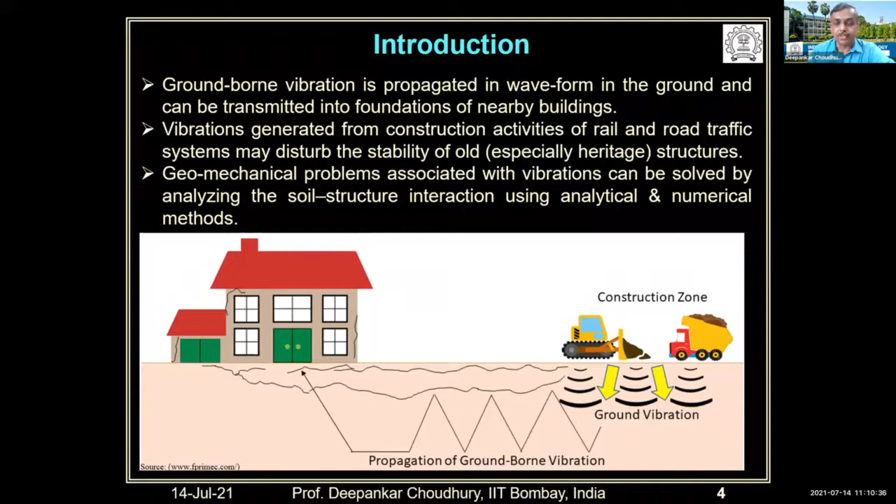So this ground-borne vibration, as I mentioned, can come from construction activity, train movement, vehicular traffic movement, etc., which need to be checked, and also seismic activity, of course. So first, I would like to highlight the theoretical work done in our laboratory. Of course, there are several researchers worldwide who worked on this topic, but from IIT Bombay, we tried to work on this area analytically and numerically.

So this is the paper. One can see the details in the Journal of Geotechnical and Geoenvironmental Engineering in 2018, a work of Tulika in collaboration with our lab and the RWTH Aachen lab, because it was under the DAAD exchange program and research project. So essentially we tried to find out, if you have an existing structure, what is the mitigation of ground-borne vibration coming from future construction, harmonic load, machine-induced load, or a future railway line, etc.

So here Tulika studied providing an open trench and an infill trench, both conditions, and how that helps in reducing this kind of ground-borne vibration on existing foundations. So this is the mitigation technique proposed, which is nothing but vibration isolation in terms of an infill trench or open trench. She checked how they perform along with the case of the German train, Deutsche Bahn's ICE, the highest speed train in Germany.

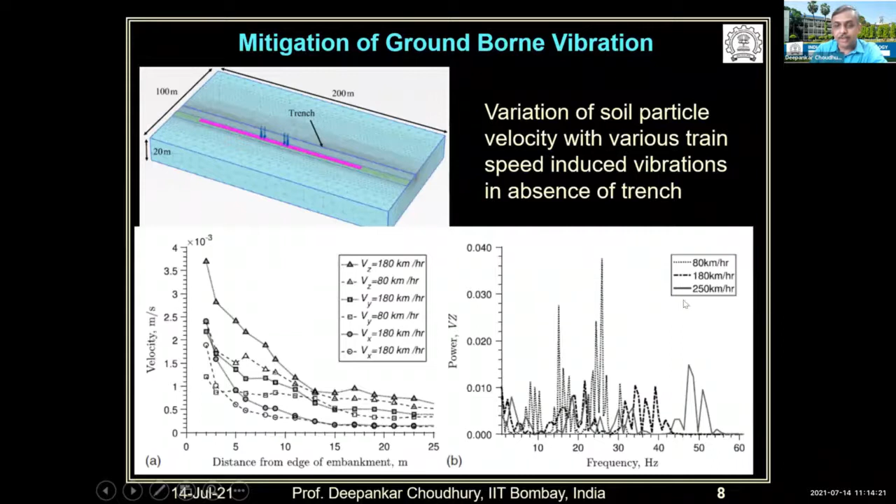This is in absence of a trench, first of all, when no remediation has been considered. This is based on different speeds of the train, shown over here.

After this theoretical knowledge, we executed two real life projects of national importance. The first case study I want to highlight: our duty as expert advisors was for the archaeological impact assessment study due to vibration, for heritage structures of the New Delhi region, for the proposed Delhi Metro extension line, in short DMRC. This is line 4, the new line coming up. As we know, till now Delhi Metro has three phases essentially, not three lines, three phases, and now the 4th phase is coming.

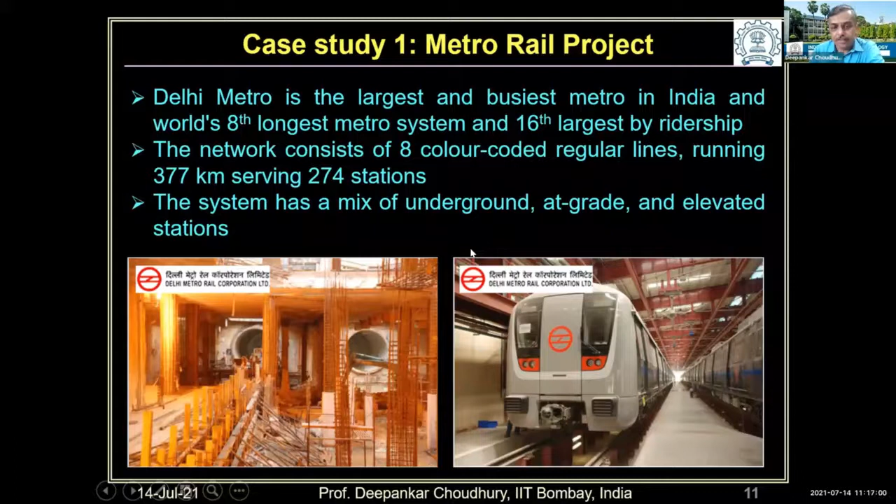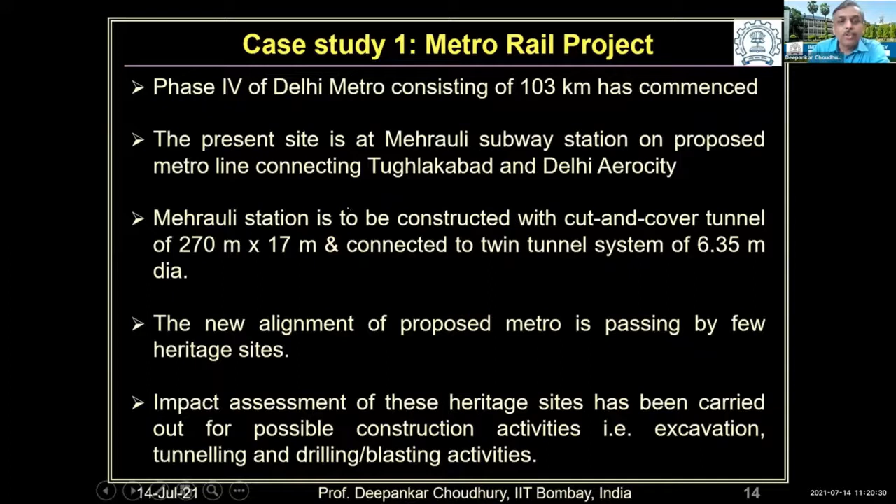Gandhak Ki Baoli is the closest one, 41 meters. The next one is Rajon Ki Baoli, 78 meters. And Qutub Minar is about 300 meters away from that line.

So what are the activities during ground vibration and transmission? These are the things which create ground-borne vibration, for which we have to find out the stability or suitability of the foundation system — foundation piling, drilling and blasting, chiseling and excavation, tunneling through the tunnel boring machine, and other construction works.

The factors which influence damage to the structure include duration of vibration, state of stress, energy per blow or per cycle, distance between the source and the receiver, characteristics of the structure, and soil profile. So what is the geotechnical condition at the site?

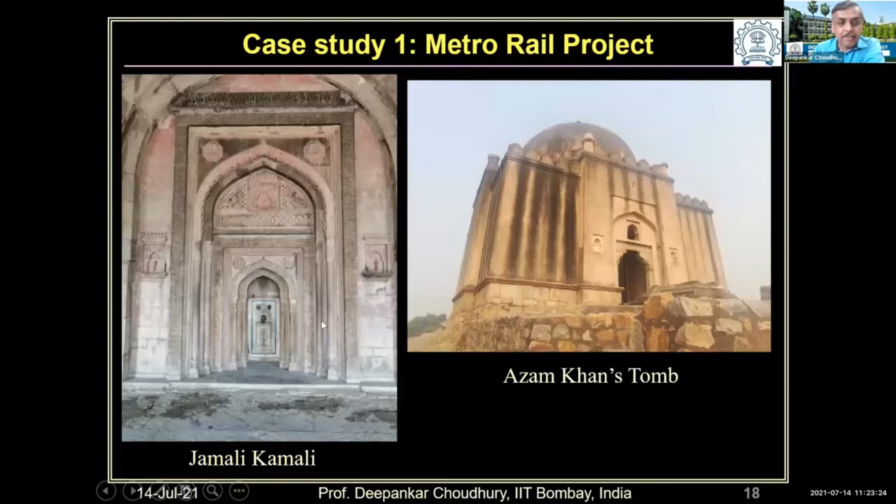The soil deposit at this site is typically about 5 to 12 meters — that is the typical overburden soil, followed by weak rock.

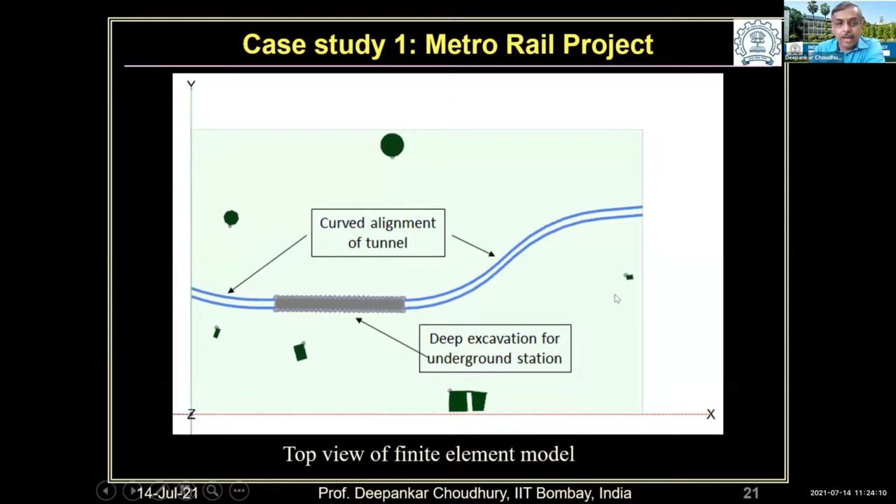The effect of ground-borne vibration due to construction activity on heritage structures has been assessed using three-dimensional finite element analysis in Plaxis 3D, to find out what happens at the Mehrauli station location first due to excavation-induced settlement. This is the Mehrauli station location, and this is the entire underground metro alignment in Delhi Metro Phase 4.

This is as per the codal provision. First we checked all the codal provisions. For such an important project, we have to stick to our Indian code, so that was checked. But in addition, we verified various other well-renowned international codes used for international projects as well, so that it increases the confidence level.

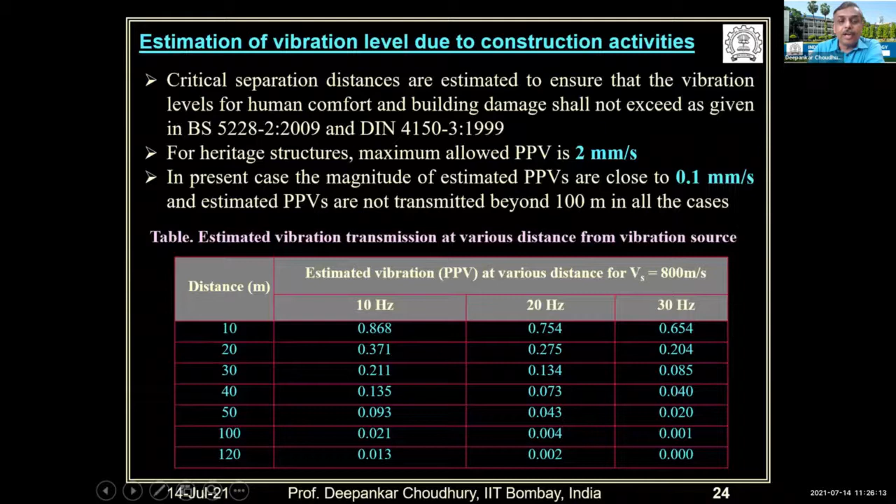Next, we have to check when the tunneling is working or tunnel work is going on, what is the induced vibration due to that tunnel work as per the BS code. You can see here the PPV value is a bit higher, it is not as low as what we have seen during the excavation time.

Then coming to the safe distance for the blasting action, it is a controlled blasting, because in the weathered rock, when they are constructing the station at a depth of 15 meters, in various phases of 3 meters each, they proposed 5 phases for the construction to be done. So as per our Indian standard code of blasting, how much blast charge is allowed at such distances for all these heritage structures, that also we have calculated.

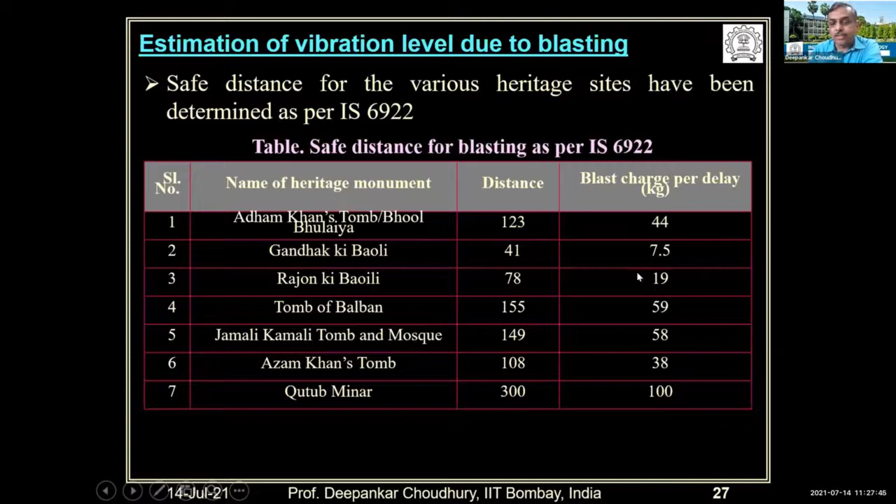Then we carried out the Plaxis 3D, three-dimensional finite element analysis for the Mehrauli metro station, which is at a 15 meter depth, with 2 twin tunnels going at 6.35 meter diameter. This is the influence zone or displacement contours affecting the Mehrauli station, and this is the cross-sectional view. You can see Rajon Ki Baoli is one of the nearest, and Qutub Minar is far away, so it is not even coming in the influence zone as far as this ground-borne vibration is concerned.

These are various plastic points for the excavation. As I said, phase-wise excavation was proposed in 5 phases for the Mehrauli station, and how much it affects the total displacement on all these existing heritage structures, that actually we have computed.

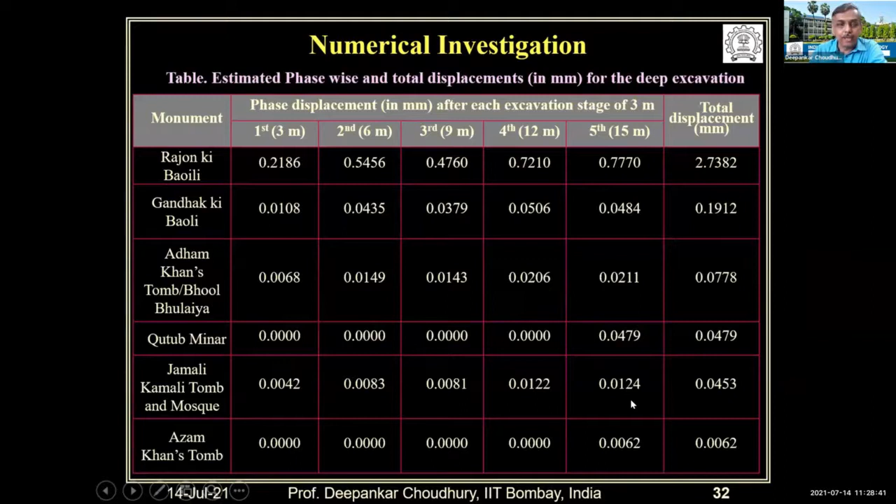Then 2-dimensional analysis has also been carried out in terms of tunnel work, like when the tunnel boring machine is moving in the entire stretch of the metro tunnel, how much disturbance or ground-borne vibration it is creating, that also we checked. You can see this is the influence zone, and these are the locations of the nearest heritage structures, for various conditions of whether a single tunnel is first constructed, left side or right side. So we have given all the options, to see which becomes the critical one, with 2 tunnels, etc.

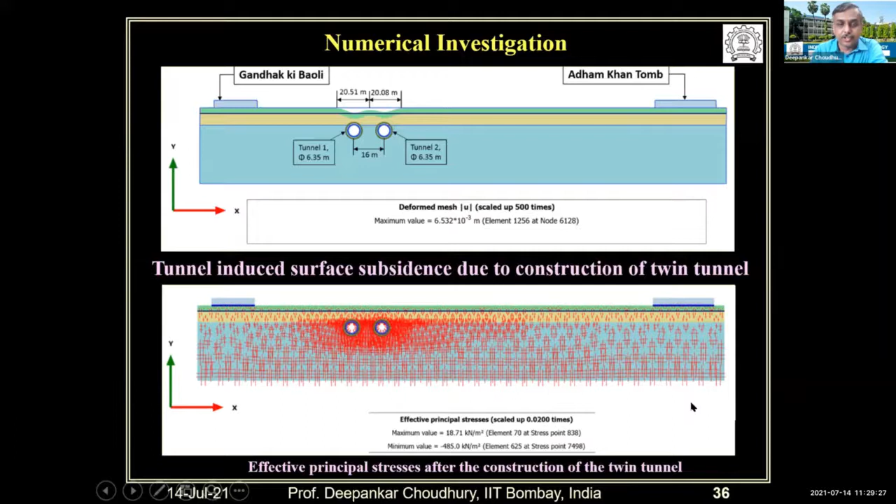So you can see this is the tunnel-induced surface subsidence, shown over here in this top picture, due to the construction of the twin tunnel, and this is the effective principal stress and how it changes.

The third thing we have to check, remember, is not only all these vibrations due to ground-borne vibration, but also due to the seismic effect, because let us not forget the zone - Delhi is in seismic zone 4, as per the Indian code seismic zonation. So we have to check whether under that zone 4 also, this activity of underground tunneling has an effect on the nearby heritage structures, how much it is there or not.

So finally, these are actually the degrees of damage you can see, and the corresponding details with limiting strain. And this is what we have finally recommended to them, what they should do, like parameters to be monitored at the construction phase and at different phases, maybe the nearby structures have to be monitored, and the frequency also has to be maintained as we have proposed over here.

So as I said, typically for 40 meters to 100 meters, those heritage structures, we found that their PPV is less than the proposed threshold limit of 2 millimeters per second, so which is safe. And that's why we have suggested that with those recommendations, they can go ahead with this construction.

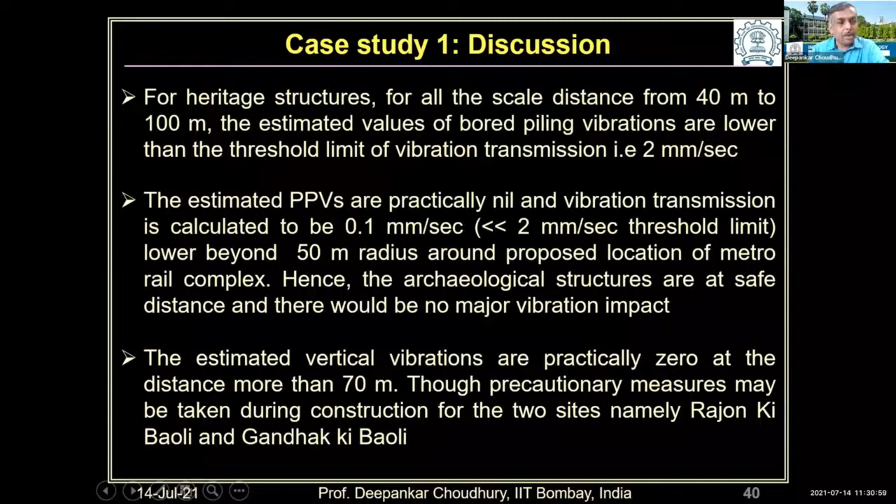Now, because of lack of time, I will quickly go to the second project which we executed recently. This is in Mumbai. You can see here, as you all know, the bullet train project is now going on in full phase. Actually, I'm happy that Dr. R.P. Singh is here as a chairman for this session. He is deeply involved in this project of the Mumbai Ahmedabad bullet train.

So we got this project through AECOM, where we have been asked to provide expertise. There is a data center building in Ghansoli, Navi Mumbai area in Maharashtra, which is very close to this bullet train site. And they are very worried, because in a data center, as you know, several systems, computers, everything will be there. The building is about 46 meters in height and the plan dimension is 85 by 45 meters.

You can see that 25 meters is the distance of this data center building from the proposed bullet train segmental line. So we have been asked to check whether it creates damage to the data center building, the foundation system, and the overall entire structure. So here also we have checked all the conditions like bullet train operations, and also during construction, the tunnel boring machine operations, how much it affects, as well as the seismic operations.

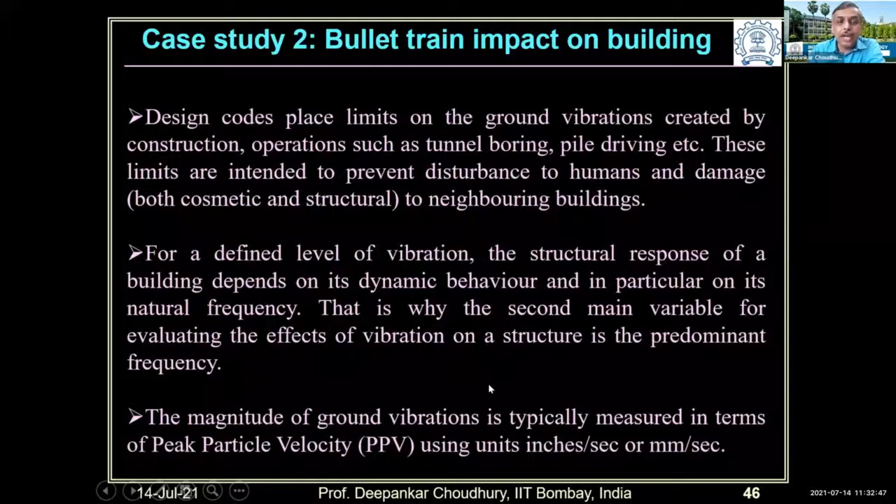So here again, we have checked the design code provisions first, and then we have executed the numerical analysis for this project, that is, how much magnitude of ground vibration is coming in terms of PPV. So first we checked the codal provisions, as I said, not only the Indian code but also all important international codes. Like first the DIN code, you can see the reference value of equivalent PPV for various constructions is mentioned over here, like 30 mm per second for well-reinforced buildings, etc.

And for buildings not corresponding to the above. So for security purposes and a data center building, with restrictions, etc., they try to go for the lower value. This is as per DIN. Again, I mentioned it is highly dependent on the frequency of your dynamic loading. So at what frequency ranges these PPV values change, you can see, for buildings used for commercial purposes, industrial buildings, and all those details are given in this code.

This is the Swiss code. Switzerland uses this code for such bullet train construction and associated ground. You can see M essentially stands for machine, traffic, and construction equipment related things, and S is related to blasting. So here also they have given a range of frequency, and corresponding to that, the limiting values of peak particle velocity for various conditions of building.

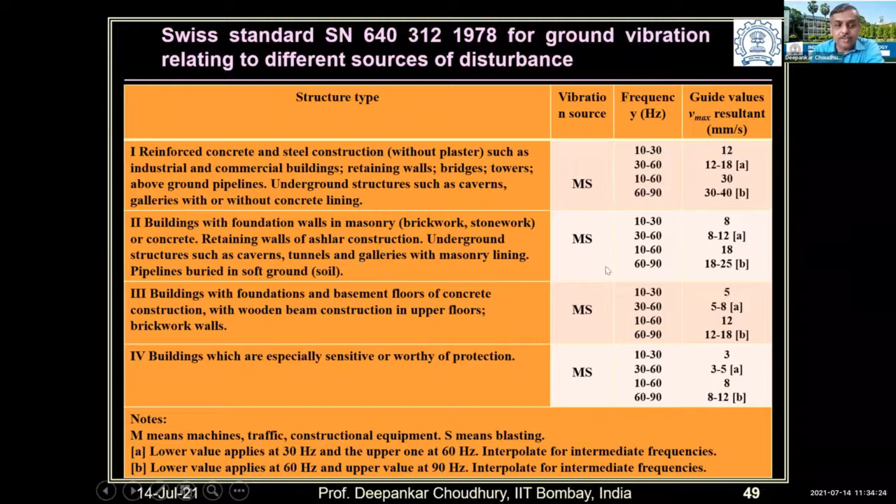The Australian standard also, you can see, for historical buildings it is 2 mm per second, which our IS code also mentions. So essentially this we have used, as I have shown in the Delhi Metro project. So this Australian standard also gives, depending on the rise of the building, the condition of the building, and the utility of the building, what the value of the PPV is.

And here the subsurface soil profiling was given to us, the SPT values at 10 borehole locations. These are the typical layers: initially about half a meter of fill material, then from half to about 2.5 meters is weathered rock, and then good quality basalt rock is available. Those aware of the Mumbai region ground profile will know this.

So now, TBM induced vibration, how much it affects in terms of PPV. This is the chart of Hiller, which is equivalent to what we typically teach in a soil dynamics course, the Richart chart for machine foundations. This is a kind of equivalence, that TBM induced vibration for different types of soil, how much disturbance it creates to human beings, to structures, whether it is noticeable, non-noticeable, blasting, and when it goes to complete damage and so on.

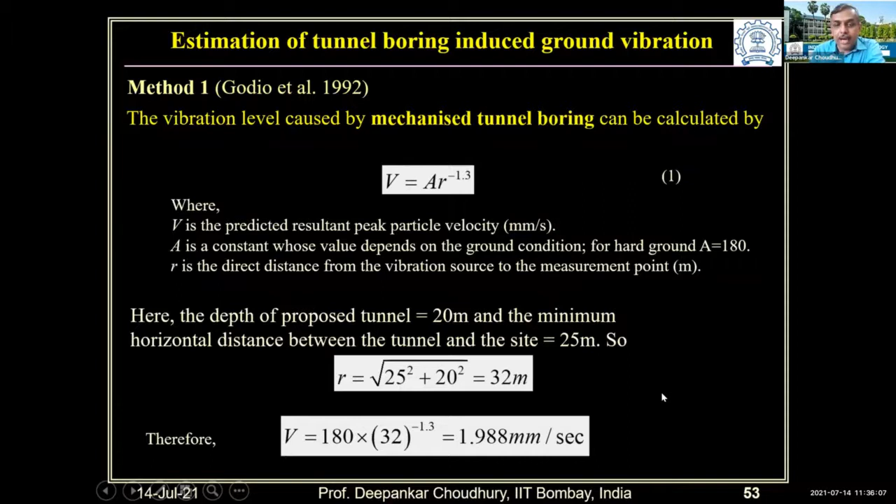Now, this also we have checked whether it is satisfying that criteria or not. So this is the tunnel location, and this is the DC building you can see, and this is the distance, 25 meter, and depth is 20 meter is proposed for this bullet train site. And this is mechanized tunnel boring, this is the first method we have adopted, and accordingly you can see the PPV value coming close to 2 millimeter per second, which is still within the limit actually.

This is another method, Hiller and Crabb method. We have used actually the source of construction induced vibration, essentially how it affects the foundation system, and how the shear wave velocity of the soil and the frequency is important, and the damping factor of the soil is important. That has been shown. These are various values of PPV depending on the distance from the tunnel site or tunnel face. You can see the third one.

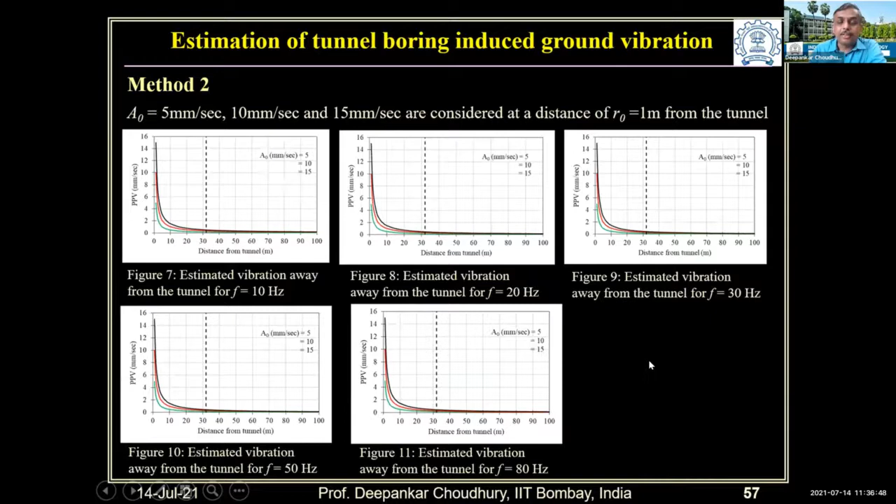So with this, our final recommendation for this project was: ground-borne vibrations at foundation level of that data center building due to the construction of bullet train and operation are within the permissible limit as suggested by several codal provisions, as well as we have done the numerical analysis also, and we have shown that. So structural damage or in worst case collapse of the tunnel will not affect any structural stability issues on the serviceability of that data center building.

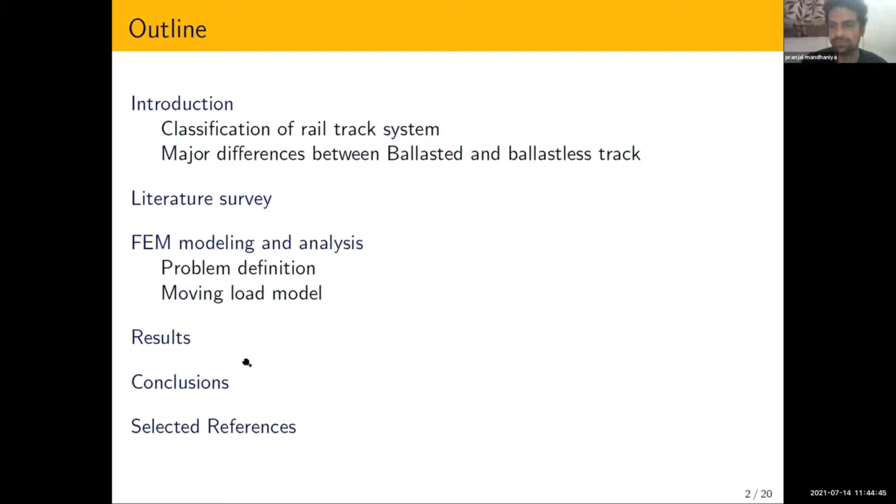So going into the introduction. There is a discussion of moving to ballastless track from the ballasted tracks we traditionally use, and there are positive and negative points of both. In India, we are trying to use ballastless tracks in metros and several structures, like the Pir Panjal Tunnel in J&K, and some parts of Konkan Railway are specifically built with ballastless track because of the conditions there, which cannot take very much vibrational load.

Now we have differences like maintenance cost and construction cost. But in short, over the life cycle, the actual cost of ballastless track becomes lower than ballasted track, because the maintenance cost of ballasted tracks becomes higher over a general life cycle of 20 years. After 20 years the costs become equal, and after that ballastless track becomes cheaper than ballasted. So let me go ahead.

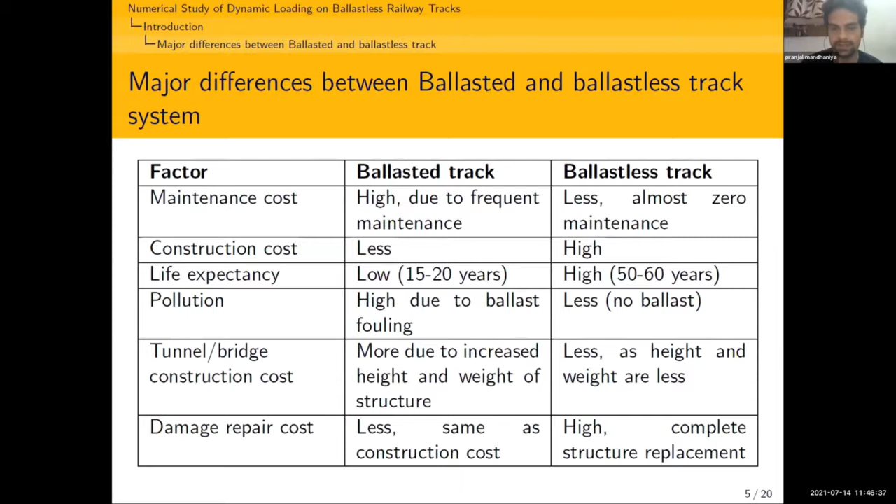Generally, we try to deal with a numerical model. In the literature, the Euler-Bernoulli beam equation, basically beam on elastic foundation, is used to solve the general mathematical equation of moving load on various layers, by various researchers, specifically Mallik et al. From my literature survey, there are experimental analyses where people measured vibration of the ground when the rail passes, as told by Deepankar Choudhury sir. It is shown in Kjorling's. And software simulation validated with lab models is done by people like Sowmiya et al. and Michas in their combined work.

So my problem statement is to design a rail track which can be used for Indian conditions. I started from the Rheda model. The Rheda model is a model where the sleepers or blocks carrying the rails are encased in a CBL layer. The CBL layer is equivalent to the ballast layer in the ballastless rail track case.

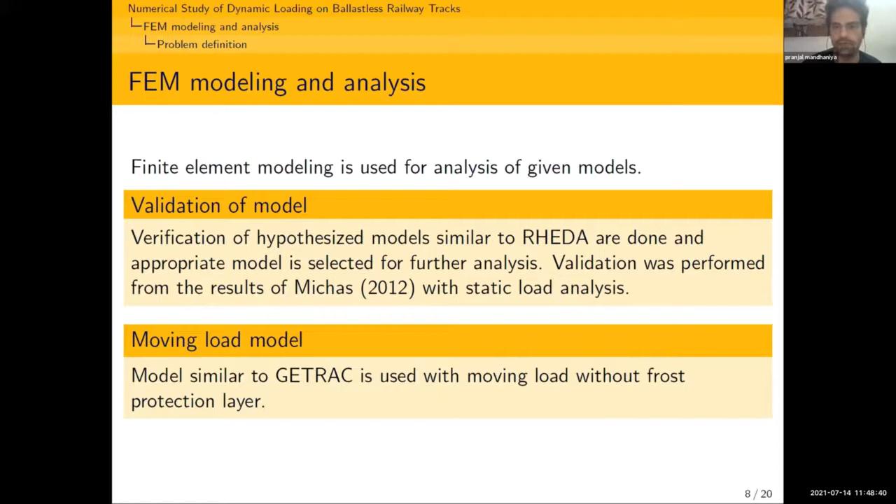So in FEM modeling, we first validated our model with the Michas study, which dealt with the static load analysis. But the authors of this research have concentrated their research on moving load analysis, or specifically a GETRAC type of model. So this is the snapshot of the Abaqus model.

Actually, we have used the symmetry of the model, but this is for showing purposes, that this kind of wheel motion will be occurring on a rail track, where we have rail placed over sleepers and sleepers placed over the CBL and hydraulically bonded layer. And finally, we have just omitted the FPL and we directly use the subgrade layer there.

And the wheel axle assembly is actually loaded by 100 kilonewton at each wheel, so 200 kilonewton as a combined load, and then the load is moved at various speeds. Basically, it's sliding. This wheel is slid, as you can see, at various speeds. So we'll see the results. These are the material properties. These material properties are generally elastic properties which are presented here.

So we actually use the static general procedure to load, and then later on dynamic implicit. Static procedures generally don't take account of mass matrix and damping. However, when we started the load motion, we used dynamic implicit, which takes account of the mass matrix as well as damping. So this is a better procedure while we move the load.

And we actually move the load 100 meters over various times. Basically, changing the time will change the speed for a specific distance. So that's how we control the speed of motion. Now the results are presented as the validation and moving load model. So let me just go ahead into the results.

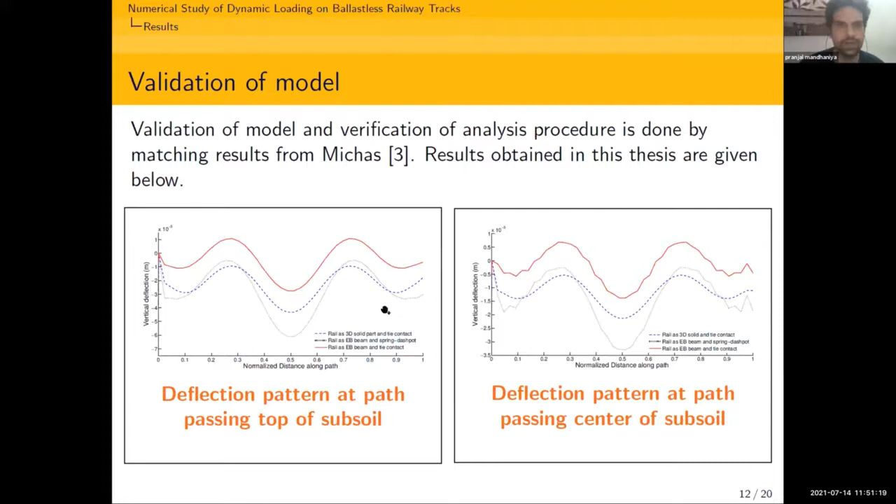However, due to our aim of realism in Abaqus FEM, we use the blue dotted line, that is rail as a 3D solid part and tie contact, for our actual model. So here you can see the results of moving load. The initial line which you are seeing here is actually frame by frame.

However, these plots are the basis of what will come after this. So finally, we measured the maximum downward deflection and maximum uplift, which are the minima and maximum of these plots. So based on this, we get this plot with increasing speed; these are the plots of speed versus maximum downward deflection and maximum uplift.

So uplift generally is not considered a good thing to measure, because in rail tracks, these are... Please conclude.

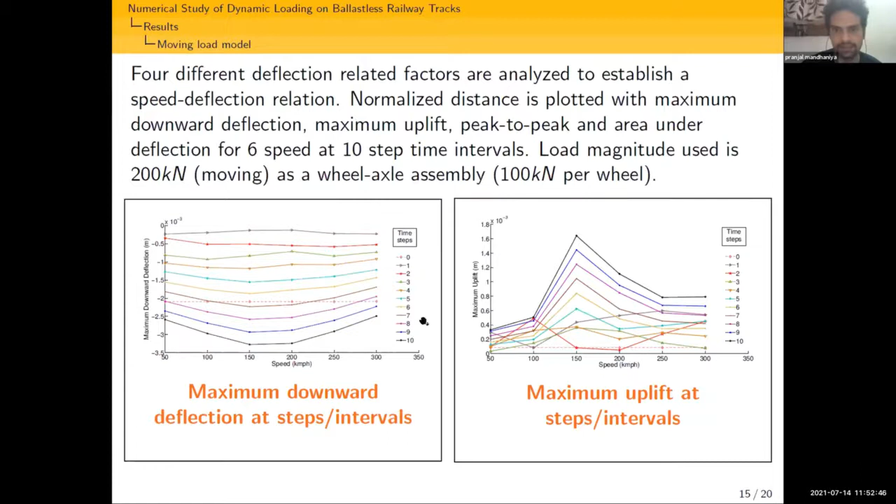Yeah. So basically, we can see that with increasing speed, we have a switch from subcritical to supercritical speeds. At critical speed, we have the maximum vibration; it's very similar to resonance. And that's what we have concluded from this, that for a track very similar to the one analyzed in this research, the critical speed comes between 150 to 200 kilometer per hour.

And there is a lag distance parameter which is almost zero at critical speed, and after passing from subcritical to supercritical, the lag distance goes from negative to positive. So that's what we concluded from our research. So these are the selected references.

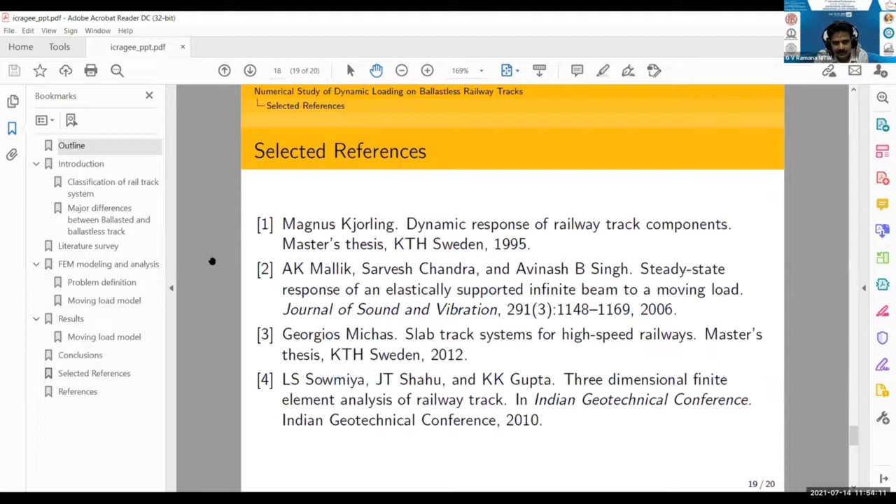So how can we prevent that vibration effect, for example, in respect of ballast and without ballast? So actually, from the literature, it was not presented here due to limitation, but the literature presented by Michas, from which we also validated it, shows that the ballastless tracks absorb more vibration using the elastic pads. In ballasted track we use the granular layer, which is ballast, so it absorbs the vibrations because of the higher deformation. But in ballastless track we use the rubber pads to absorb those vibrations under the sleepers.

So is there any material testing for that one? How much energy it can absorb? Sorry, sir, I couldn't hear you. Yeah, those elastic pads, whatever you have used, have they had certain basic tests? Yeah, so not exactly the test, not a material testing, but there has been model testing by comparing the rail track with and without using the elastic pad.

So there are several, what should I say, Chinese papers from CRTS III, which is the Chinese high speed rail track 3. There has been several research on this, and they have concluded that using elastic pads in any form will be beneficial instead of not using them. And there is research from Germany as well, so it's good to use them to reduce the vibration, I think.

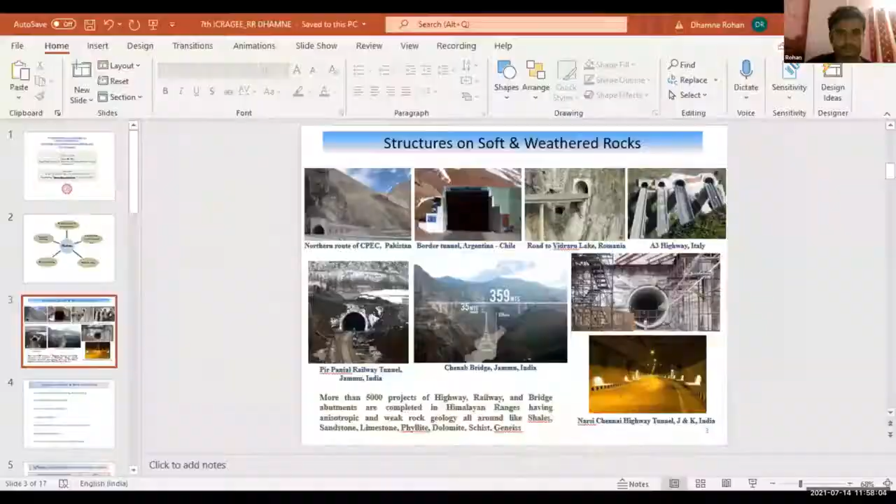Today, I'm going to present one of my research topics, analysis of urban tunnels under different loading conditions. I'm an MTech student from IIT Delhi. So first, we look at the outline: the structures which are currently there in soft and weathered rocks, the problems associated with those rocks, then static loading, dynamic loading, and how I have validated the small-scale experimental modeling with the numerical modeling approach.

As most of you know, large deformation in underground structures at shallow depth has always been a threat to engineering safety in tunnel construction, especially when the tunnel crosses a highly induced stress area, for example joints or fracture zones and weathered or soft rocks. These are structures on soft rocks which have been constructed and are facing the same problem.

So large deformation occurs in the rock mass. It totally depends upon the basic engineering properties, which we mostly determine through laboratory work, such as the uniaxial compressive strength, water softening, rheological characteristics, etc. So the basic objective of any design engineer is to determine the stress concentration in that rock mass. And how to determine it? By creating a uniformly distributed stress field, so he can optimize his support system as well.

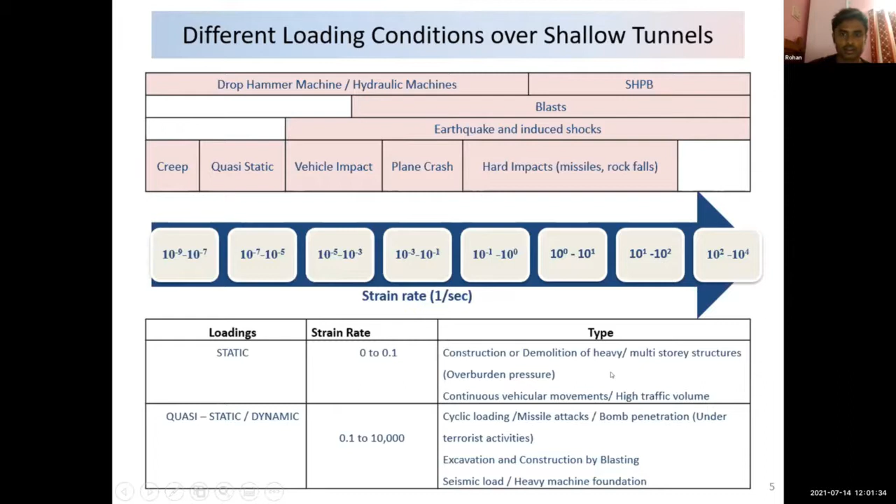Uneven stresses act on the lining at very low strain rate. There are different loading conditions finally analyzed on urban metro tunnels, which occur at very shallow depth. First is static loading, then quasi-static or dynamic loading. In static loading, the strain rate ranges from 0 to 0.1, and in dynamic loading it ranges from 0.1 to 10,000. These are the types of structures present under these loading conditions.

To validate these structures with prototype modeling, as you can see on screen, there are missile attacks occurring through terrorist activities or other organizations, which impact our underground metro tunnels or subway structures at shallow depth. The result is that the tunnel is totally or completely destroyed.

To safeguard this structure and to continue experimental investigation on practical or real life structures is a very tedious and costly process. We cannot complete or continue our experimental study for practical purposes.

So to simulate this kind of structure, we created a small scale model through experimental investigation, and validated it with numerical modeling using LS-DYNA version 6.4, validating it completely by selecting different material properties. I will come to that. Using scaling law, we reduced the dimensions of the structure in a small scale model.

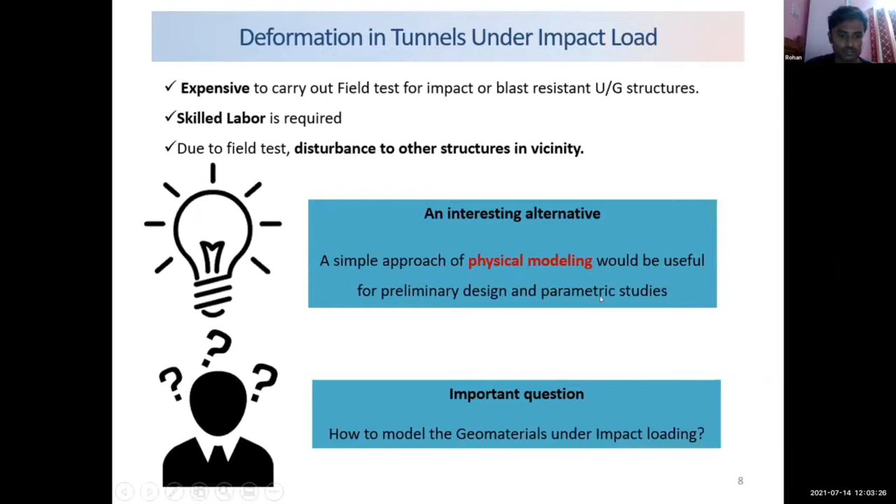Most of you may have a doubt in mind about how we are going to model geomaterials under impact loading. By keeping different kinds of structures and material properties in mind, I made one geomaterial consisting of different materials with different specifications and proportions.

To validate that particular project, once the small scale model was validated experimentally, we could clearly validate it with the prototype model. For this, we selected a project called the T48 tunnel, Udhampur-Srinagar-Baramulla, with all its specifications, locations, and material characterizations.

To validate our physical experimental model with the field one, we take the proportion of modulus of lining by modulus of rock in the experimental model, compared to modulus of lining by modulus of rock in the field. If the proportion is the same, we can clearly use it to validate the experimental study.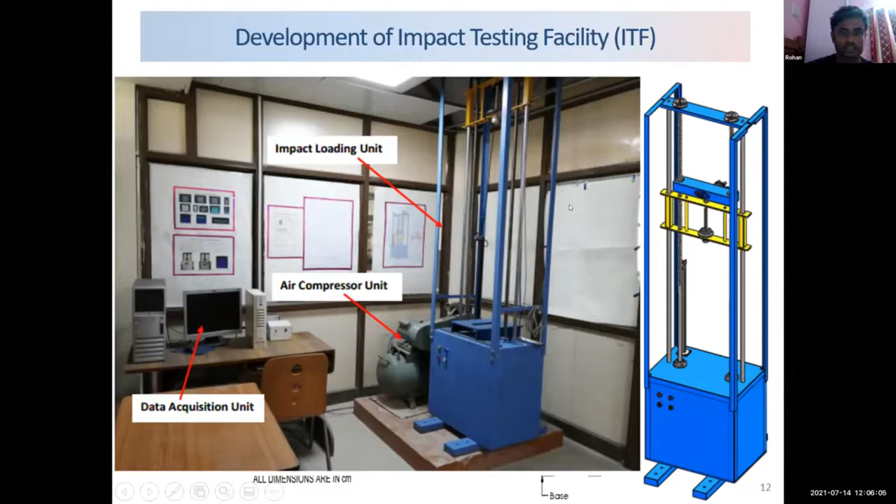And for my modeling, I have taken 3 cover depths. Here you can clearly see the experimental study, which I have done through the impact testing facility. I have made a model of geomaterial and taken different cover depths, from 25 mm to 50 mm.

By using scaling law, I have degraded its dimensions to validate it with the experimental one, and to validate it with the numerical one, I have used Abaqus 6.4 version. I used different meshing techniques and performed a mesh convergence study.

There are two curves, load-displacement curve and energy-displacement curve, which define the validation between the numerical and experimental study. So the conclusion of my part is that the depth of the overburden is a very crucial, very critical parameter in quantification of the fracture threshold.

The tunnel follows a Gaussian distribution along its length, as you can see in the curve. In the lower part, the maximum deformation occurs.

There are 3 cover depths: 25, 35, and 50 mm. At the low cover depth of 25 mm, the deformation has been very high. I observed that the surrounding material fails in shear, and the failed surface has an elliptical shape at the top of the tunnel, as you can see in the present graph.

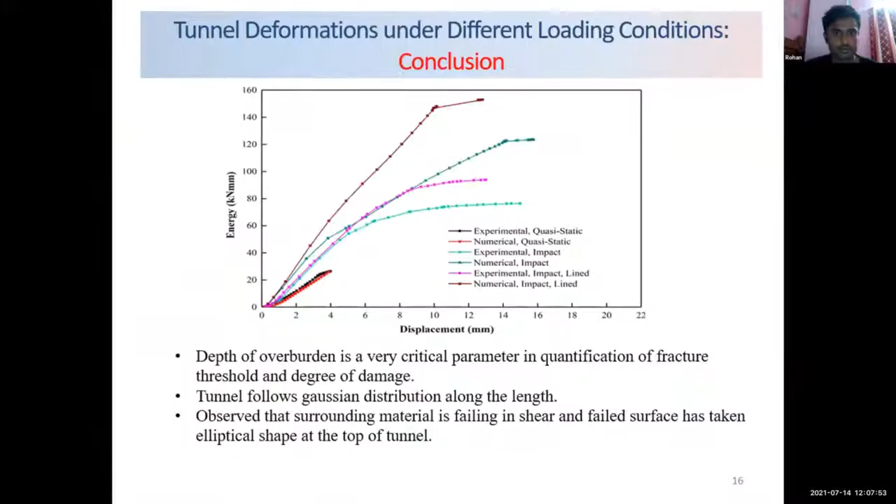Sir, I think there are no questions from any participant. I think one quick question: what is the difference, for example, in energy interaction or energy absorption between the soft and the weathered rock? Which one is more effective, and what is the difference between soft and weathered rock?

As I told you sir, the soft and weathered rock mostly depend upon the UCS, which we evaluated through the laboratory. But the most affected rock is mostly the weathered rock, because over time it degrades due to physical and chemical weathering. In both cases we covered our experimental study and analyzed that the weathered rock is more crucial than the soft rock at low cover depth, mostly at 25 mm cover depth, where we identified the most deformation occurring when we took the weathered rock in our scenario.

So what boundary conditions have you applied at the time of modeling? The boundary condition I applied, especially on the weathered rock: I put a hinge support at the bottom of the model boundary, and in the two corners, in the two vertical directions, I applied roller support.

My particular question is about the weathered rock. How have you actually addressed it in the modeling? I have used its material properties to define the weathered rock while doing the numerical modeling in Abaqus, by selecting its different properties. Give me one example of weathered rock. What particular weathered rock has actually occurred in a real field point of view?

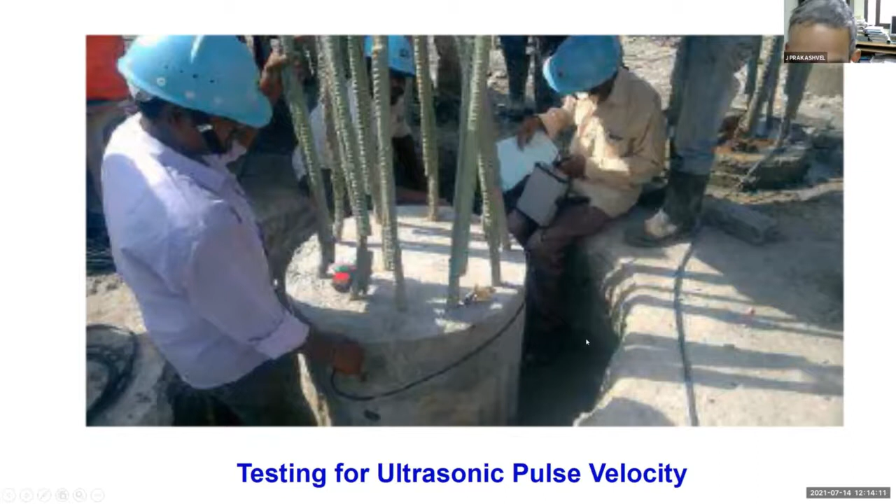Pile integrity test results depend upon the pulse velocity in the concrete. Hence we measured the pulse velocity also before going for the pile integrity test.

We give a small impulse over the pile top. Before going for pile integrity test, the pile top surface should be prepared well, because otherwise, if undulations are present, ringing waves will show up and that will not be useful for us. Hence the pile surface should be prepared with cement mortar or Conbextra GP, and it should attain sufficient strength to take the hammer impact.

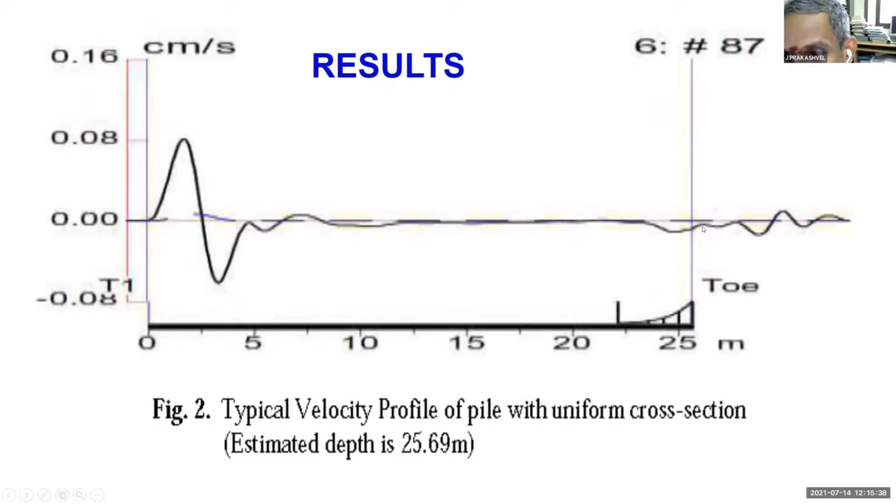Our observation is that we carried out the pile integrity test for 160 piles, out of which for 101 piles we measured a depth of 23.4 meters, which is above 90% of the design depth. For 10 piles it is below 23.4 meters, and for 49 piles we could not get the toe reflections.

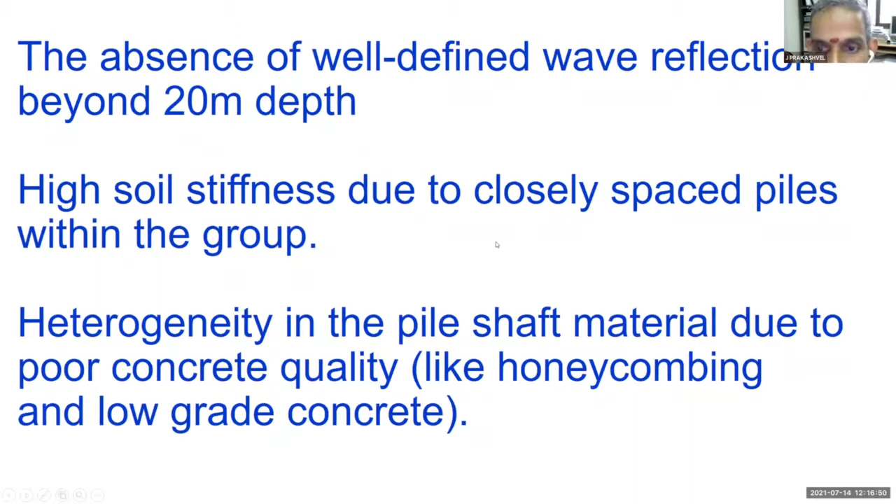Our main inference from the study relates to the soil stiffness. The pile itself was for the TG foundation of a power plant, hence it was very closely spaced. Moreover, the soil had previously been used for filling fly ash from the nearby power plant, so as a soil improvement measure they used sand piles at an interval of 0.5 meters. Hence the soil was stiffened. Due to this high soil stiffness, we could not get toe reflections for most of the piles, in addition to non-uniformity in the piles.

This is our acknowledgement, thank you. Thank you, I have a few questions - in all your graphs which you showed, the y-axis was different in all the graphs.

So it is very difficult to compare which graph is having a defect, because the things get magnified. So in future you can have uniformity for better understanding. And in normal practice also, what the agencies do is they change the scale, so we will not be able to identify just by seeing the graph whether there is a defect or not. So scale is an important part. That is number one.

And second, can you tell something about the limitations of this pile integrity test? Because most of the time we are not able to identify the defect, whereas with other integrity test methods like cross-hole sonic logging, we are clearly able to distinguish that the pile is having a defect at these locations. So would you like to comment on it?

Sir, this is a purely qualitative test. And moreover, regarding depth, we tested up to 30 meters depth. That is the main limitation of this test. And we cannot quantify the defects.

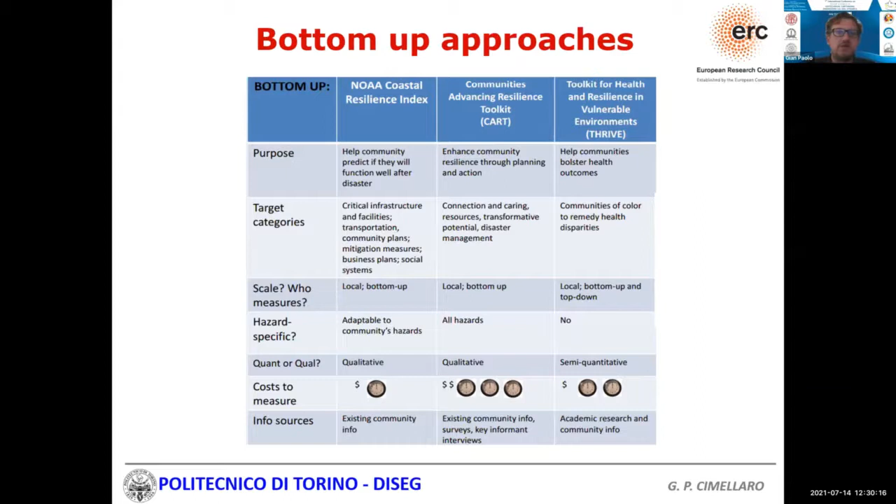Now, the main issue is how to measure resilience. So we have different types of indicators which can be classified according to the hazard, to the temporal, to the spatial scale. I will not go into the details, just to show you that there are many indicators, and there are also many approaches. Probably this list is not complete, but I grouped them mainly in 2 main groups: the bottom-up approaches and the top-down approaches. Here in the bottom-up approaches, you can see a series of methodologies like the CART or the THRIVE, and they can be either qualitative or quantitative, including all hazards or only a few specific hazards and so on.

And then we have top-down approaches. Even here we have the Hyogo framework for actions, the SPUR, which is the San Francisco Planning and Urban Research Association, the BRIC, which is another indicator from Susan Cutter, and at the end we have our model, which is the PEOPLES Resilience Framework. And if we focus on the PEOPLES Resilience Framework, basically this is a GIS approach, which considers each infrastructure or dimension as a layer. And these layers are 7 in the PEOPLES framework, and they can be combined.

There are 2 ways to combine this information. One is a scenario-based approach, in which basically you are supposed to have a hybrid model of your community, where you have physical lifelines and non-physical lifelines. So you can model both infrastructure like water distribution and power distribution networks, but also emergency authorities like search and rescue, first aid authorities, policemen, and so on.

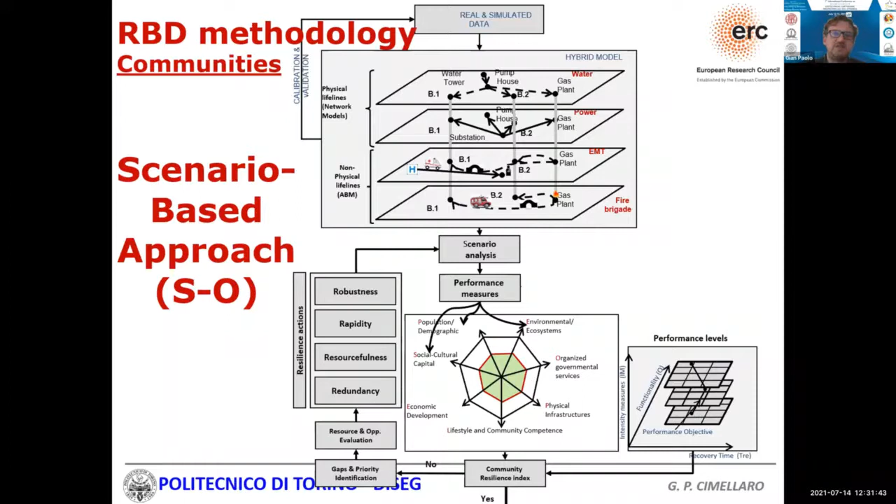And once you have this huge model and you calibrate the model, you can then measure certain performance using the PEOPLES framework and compare this with certain performance levels. If you're not satisfied with that, you can act on the 4Rs, which are robustness, rapidity, resourcefulness, and redundancy, in order to improve the resilience of the entire community, and then use this for designing.

Of course, this process is quite complicated because it requires the model of your community. If you don't have that and you want to use the PEOPLES framework in a simpler way, you can use an indicator-based approach in which, for each one of the dimensions, components and subcomponents you can see here, you have a corresponding indicator. We identified more than 125 indicators, and we didn't want to reinvent the wheel, so we combined them using data from the census.

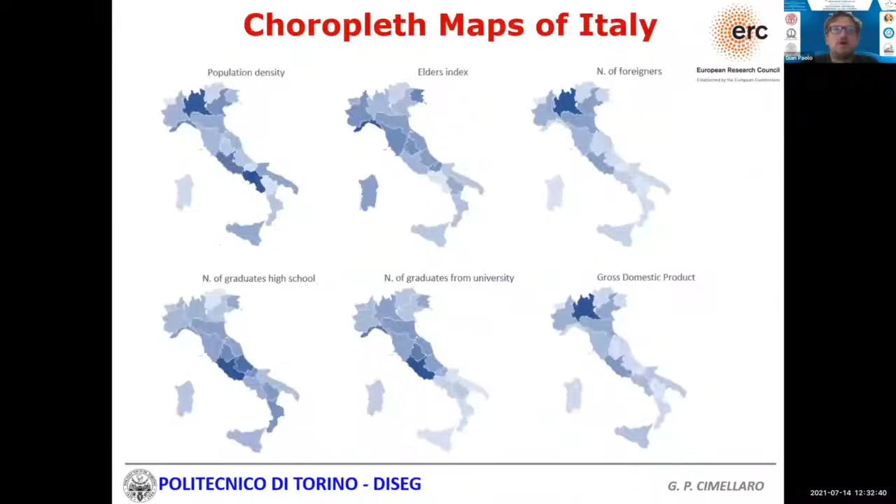By doing that, we show here a simple application to our country, in this case Italy, selecting some of the indicators which belong to the PEOPLES framework, which we can find in ISTAT. Then we plot the choropleth maps of Italy. As you can see here, there are a series of indicators, and by doing that we could get the resilience of the emergency response and of the reconstruction phase.

As you can see here, some regions are more resilient in emergency response, in particular the central part of Italy, because they have more experience with respect to the northern part, which is the richest part, and so has performed better in terms of the reconstruction phase, for example. Now, all this information has been combined in a software which, because we are at the end of the project, we are going to release, so it will be publicly available.

In this software, we uploaded one community. The community that you're seeing here is the city of Turin, or at least a resemblance of the city of Turin, in which we implemented certain types of data that were available. Whenever these data were not available, we made up the data, in particular for the power and the gas network, which are sensitive information that we couldn't share. We had to make a reasonable network, which is probably compatible with the existing one.

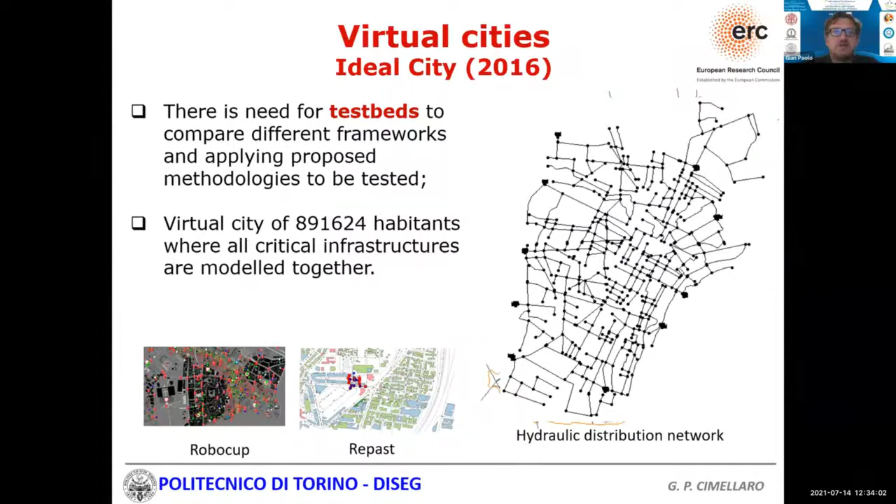I will go quickly. With this model, first we did a large-scale simulation of what we call the ideal city. This is a city of about 900,000 inhabitants, and we modeled all the critical infrastructure, from the hydraulic network to the buildings. I will go quickly through how we collected the data from the buildings. Basically, we collected information about the year of construction, geometrical data, and some additional information about the economy. All this information was taken from websites, from the City Hall, as well as from some European projects, and also about the typology approach.

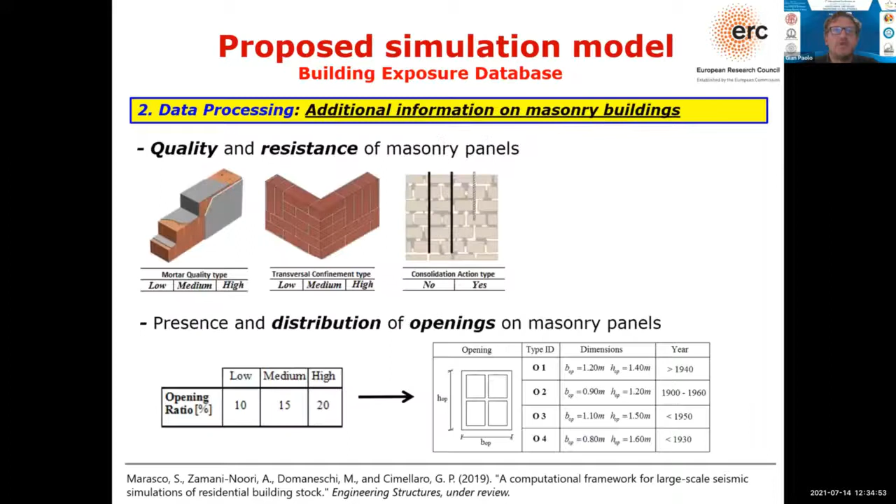Most of the buildings in Turin are made of masonry. As you can see here, we categorized them according to the technology and the typology of buildings. Then we looked also at the seismic zone. Through the years, the earthquake zone changed, and we looked also at the resistance of the masonry panel according to the openings. So we defined a sort of backbone curve, a capacity model; we identified two capacity models, one for reinforced concrete and one for masonry. Through an energy approach, we were able to identify these 4 points of the curve.

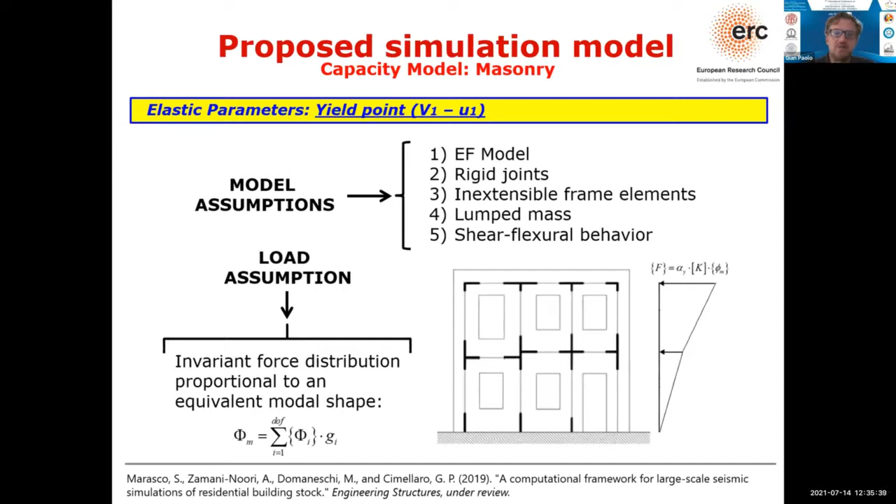I will not go too much into the details. I will skip some of the slides about the methodology, but at the bottom you can see there is a paper that has now been published, so you can have it if you are interested in the details. We applied the same concept also for the masonry by converting the masonry panel into an equivalent frame, and we were then able to model the multi-story building with an equivalent single degree of freedom nonlinear system. This is the Takeda model that we use to model each single building. We implemented all this in OpenSees in Python, and we ran some analyses.

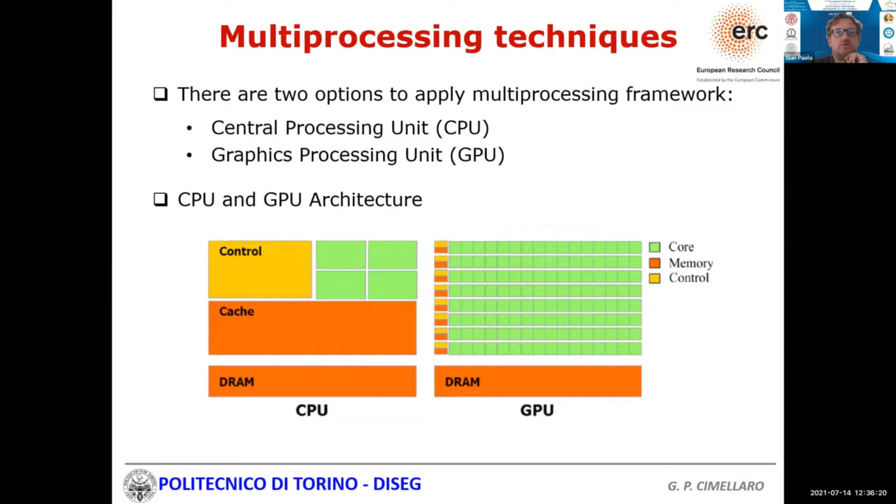Here are some examples using the supercomputer that we had in our research group. We looked at the speed and tried to make the simulation faster. In particular, we tried to use the GPU instead of the CPU, but there were some issues with OpenSees, and in the end we decided to keep using the CPU. The main idea is that we had something like 80 cores, with each core assigned one single building, a single degree of freedom system; we run the simulation, and once it is done, we assign the new building to that core. We compared the results between GPU, CPU, and the multiprocessing technique, and found that in the end multiprocessing on the CPU was faster than the single-core CPU and also the GPU.

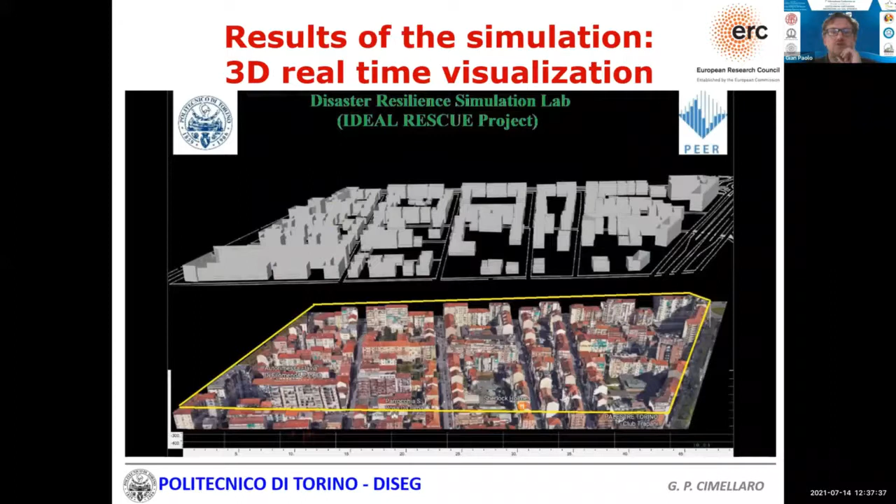And we compare these results with the building archetypes and the era of construction. As you can see, in red is the downtown area, which is mainly ancient old masonry buildings. And when we ran our simulation, we figured out that the most vulnerable part was downtown, as expected. And far from the epicenter, we have low damage.

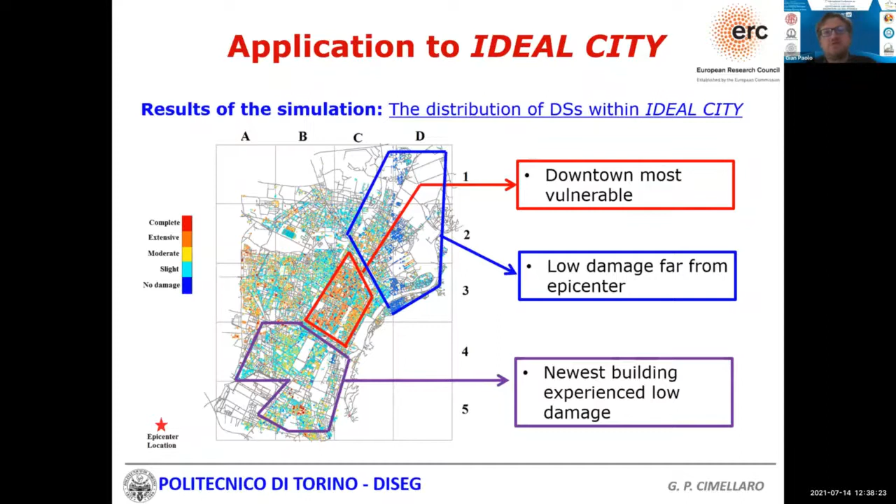And also the newest part of the city, which is in the south part, even if it was close to the epicenter, experienced low damage. So everything at the end was as expected. Here are some results comparing the year of construction with damage data and so on. Now, the main issue, however, when we calculate resilience, is how to estimate downtime.

Now, we apply this concept of downtime to residential buildings. But today, in this presentation, I will show you how we apply the same concept in developing countries. Because, as we know, most of the vulnerable countries are the ones that are developing, because they are usually mainly affected by natural and man-made hazards and poor quality of construction, and the fact that sometimes we don't apply any seismic design causes a lot of that.

These types of buildings are here. I simply categorize them in adobe buildings, which are basically low energy buildings, which are fireproof and biodegradable. And they actually perform pretty well against earthquakes. Then we have the stone masonry buildings, which are a common type of building in rural areas. However, you need to provide certain retrofit techniques in order for them to perform well during earthquakes.

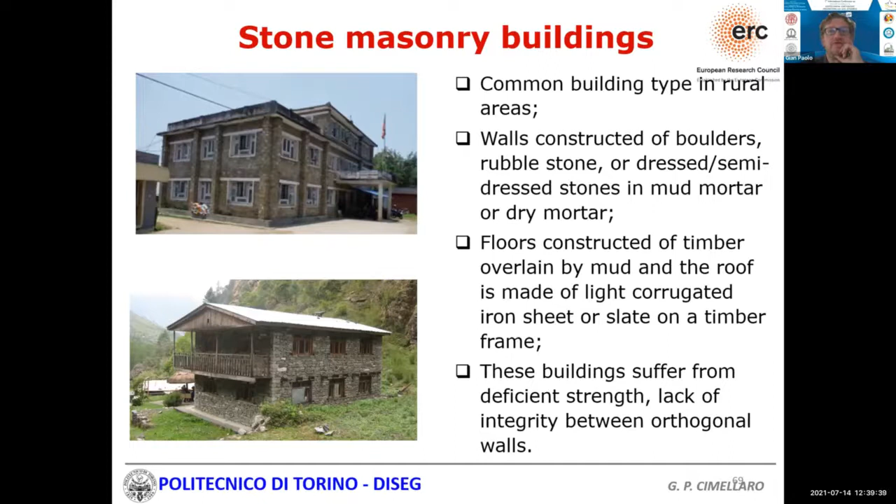And then we have bamboo buildings, which is a green, biodegradable, and eco-friendly material, and is usually a good alternative for steel when steel is not available. And there are also prefabricated bamboo buildings and concrete surface rammed earth core buildings. Now, how do we estimate downtime for this type of buildings?

So the main challenge is due to the fact that we have to deal with imprecision and uncertainties. Uncertainty that comes from the high number of involved parameters, by the accuracy of the available data that sometimes is not sufficient, and by the fact also that there are no models developed for this type of buildings in developing countries, and most of the time this downtime is affected by subjectivity and based on experience.

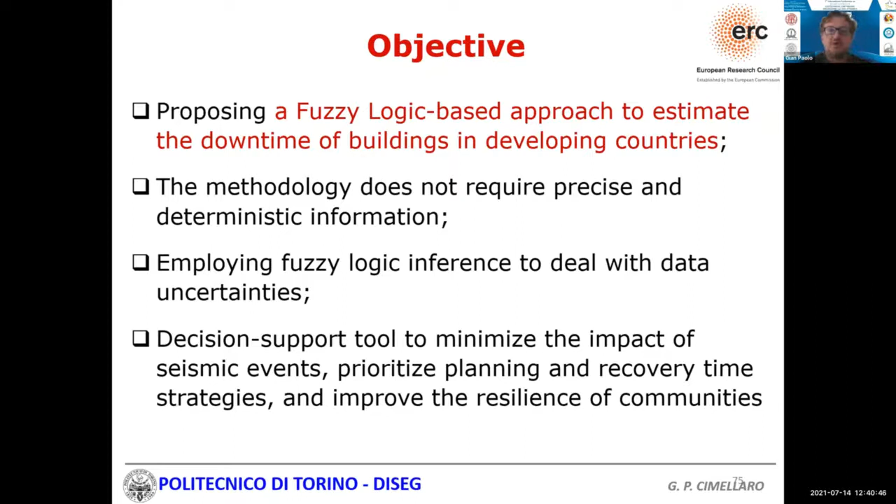So what we try to apply is a fuzzy logic approach to estimate the downtime for these buildings in developing countries. The fuzzy logic, I will not spend too much time. I assume the fuzzy logic approach is taken for granted, but this methodology was developed by Zadeh in 1965 and is used to quantify certain degrees of uncertainty or certain measures that are qualitative only. And this is the scheme that we use.

Basically, the methodology that we apply is based on estimating first the post-earthquake building evaluation using a rapid visual damage assessment. And then we build a building damageability model, which is based on a hierarchical rule, through which we use inference to combine the indicators that come from the fuzzy logic. And then we finally estimate downtime combining three values of downtime: the downtime due to repairs, downtime due to delays, and downtime due to utilities disruption, which is the classification given by one professor at UC Berkeley.

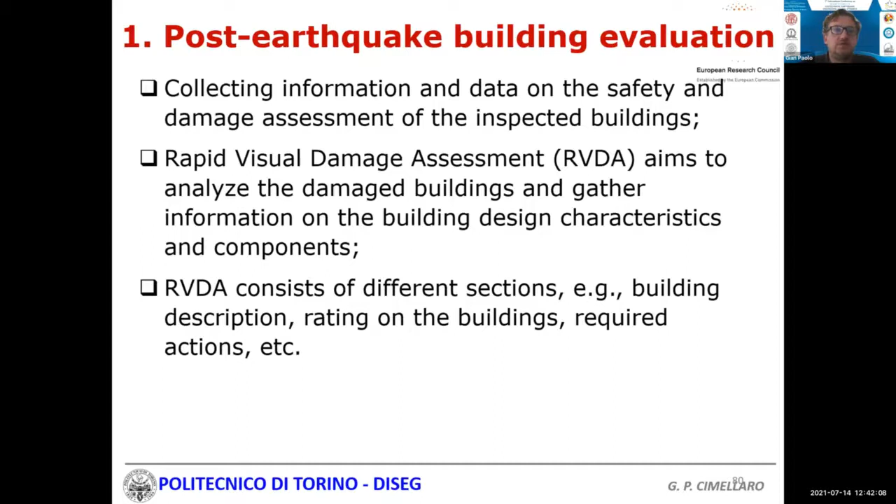So in the post-earthquake building evaluation, basically this RVDA aims to analyze the damaged building and gather information on the building, design characteristics and components, and is also used to describe the buildings. Then we have the building damageability model.

Now, to get this information about the downtime, we try to get the information of downtime taken from PACT, which is a software provided by FEMA, the US Federal Emergency Management Agency. But this data were not good for developing countries. So we collect data from basically surveys that we performed in the earthquake which happened in Nepal in 2015, and we combine them to get the downtime due to repairs.

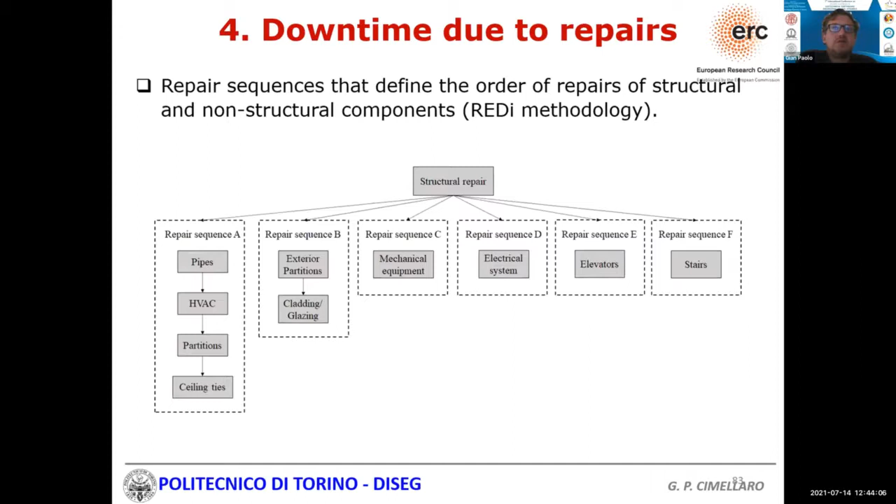This is the repairs, and for each component, we can calculate for structural and non-structural components using the methodology, which is the REDi methodology, to calculate this downtime. And finally, we get this probability of non-exceedance and the downtime due to delays. And finally, we have also the downtime due to utility disruptions that can be caused by some of these power networks or transportation networks being inoperative, delaying all the process of the restoration.

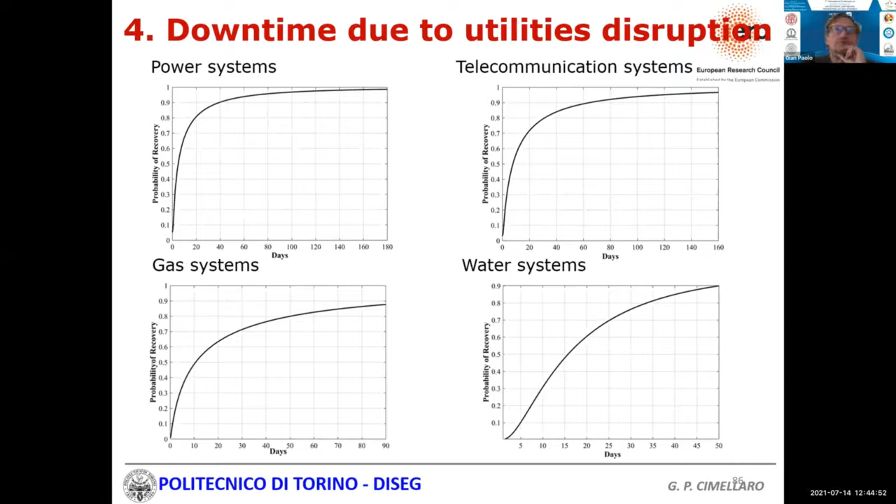To take into account the utility disruption, we use some fragility curves, which have been built based on earthquakes collected from 1960 until nowadays. It's a simplified approach, but it's the best that we could do with a simplified model. And then once we evaluate these three downtimes, we combine them to get the final downtime for developing countries.

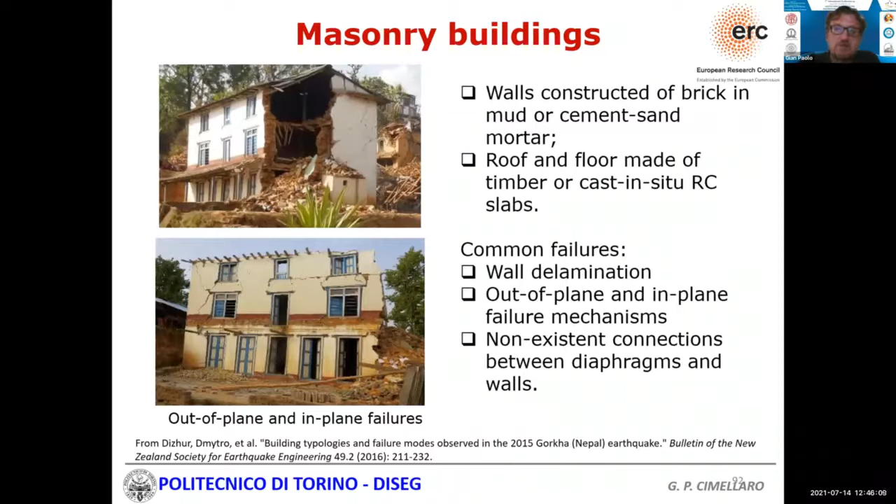So with this database, basically, we look at the behaviors and the typical common failures for certain types of buildings. In particular, we focus on masonry buildings, so only one specific type. And the masonry buildings have some issues which are common also in Italy, which is the out-of-plane behavior, and also the missing box behavior in the upper floor.

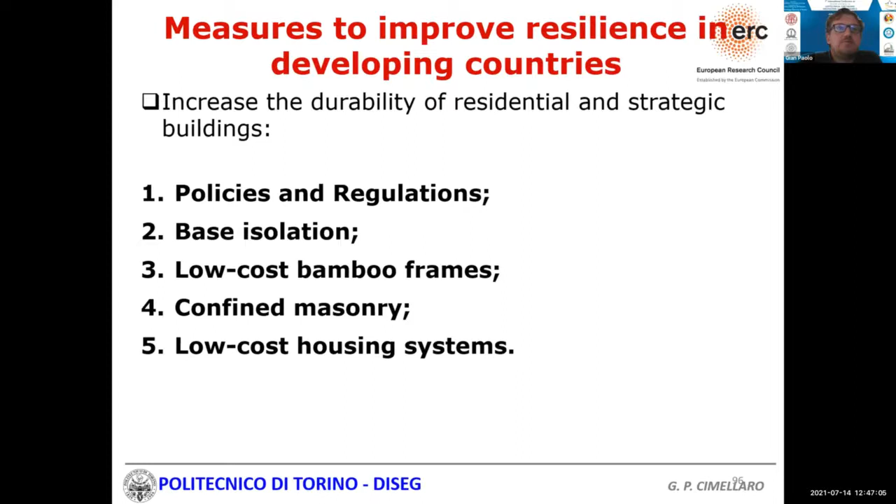Okay, and then we have a series of measures to improve resilience in developing countries. So we can work on policy and regulation, some techniques like base isolation, low-cost bamboo frames, confined masonry, low-cost housing systems, and so on. Policy and regulation means also implementing simple construction practices to reduce the risk of collapse, educating private owners, and adopting approaches based on disaster risk regulations.

For the base isolation, in developing countries, we can use recycled rubber fiber reinforced bearings, which can have a rectangular shape because that's easier to manufacture. Or we can use simply a sand rubber foundation layer, on which the structure should be designed to withstand the earthquake acceleration, for example. Low-cost bamboo frames are also applicable in specific cases.

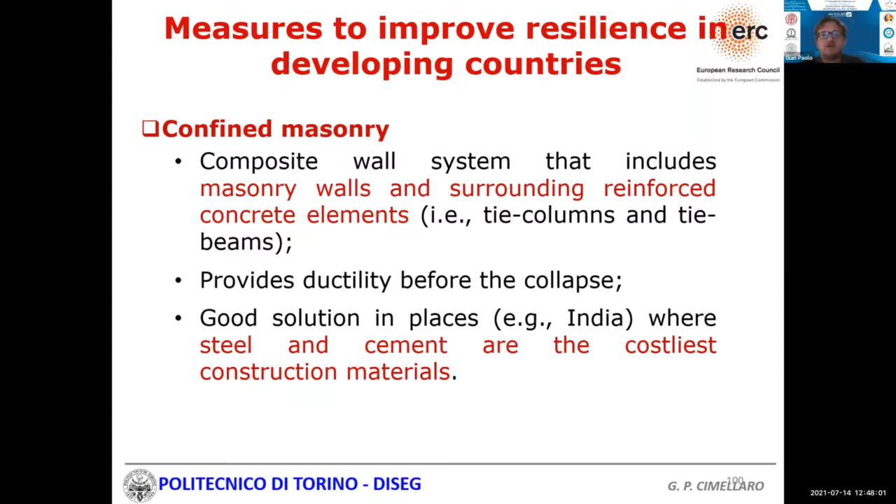Well, so this is the part related to the developing countries.

Now I want to conclude by showing some parts of our project related to the transportation network. We analyzed, for the city of Turin, which we call the ideal city, the transportation network. We developed an efficiency matrix with more than 15,000 nodes, using two indicators: the average vertex degree as well as the efficiency, which is the shortest path between one node i and j.

We compared these results with 4 earthquakes: Northridge, El Centro, Kobe, and L'Aquila. Then we looked at the interdependency.

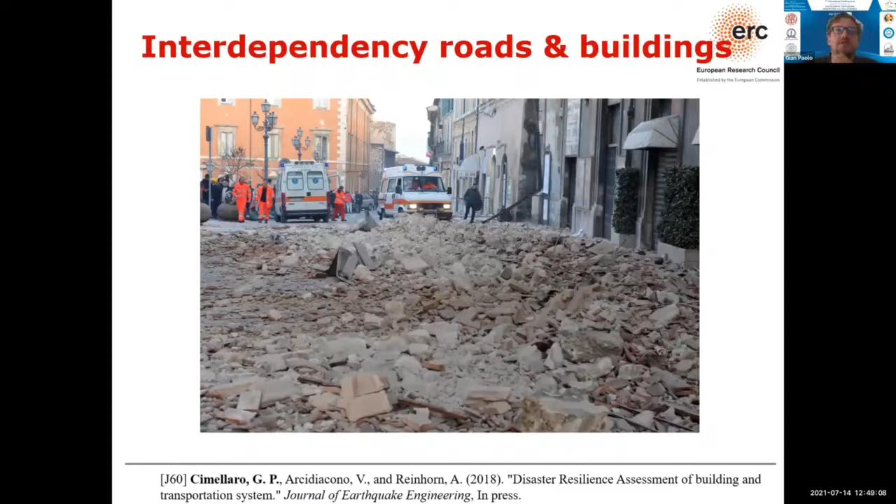This is a picture we took in 2009 after the L'Aquila earthquake, showing the presence of debris due to the partial collapse of buildings, making some of the roads unavailable. These roads need to be cleaned and made available after an earthquake to allow emergency rescue operations to act.

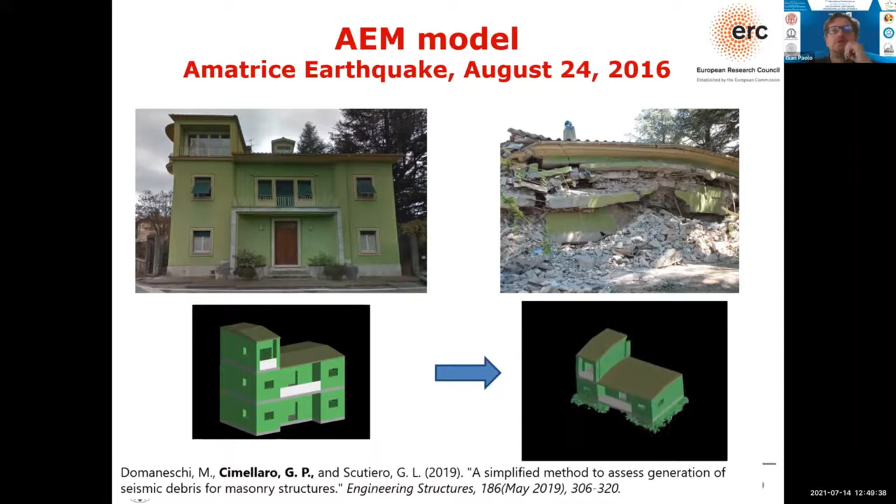So to do that, we decided to implement a software using the applied element method to estimate the extension of debris caused by the collapse of some of these buildings. This is one building that collapsed in Amatrice during the 2016 earthquake. We modeled this in the software, and we were able to calculate, using a geometrical formula, the footprint area of the debris caused by the complete collapse.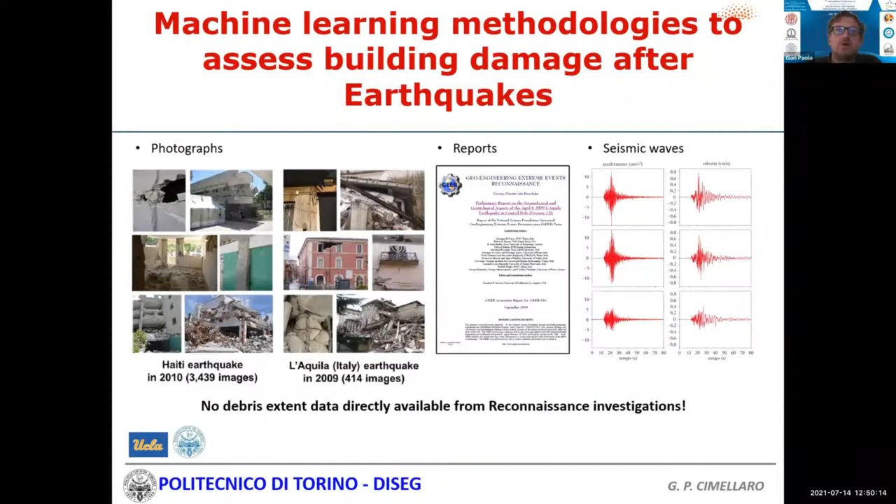What happens if there is partial collapse? For partial collapse, we decided to use artificial intelligence. Using a genetic algorithm, we were able to detect the extension of debris through image detection.

We analyzed some specific pictures, as you can see here. Using this data and information, we were able to select good pictures versus ones that were not good, by looking at 14 different earthquakes.

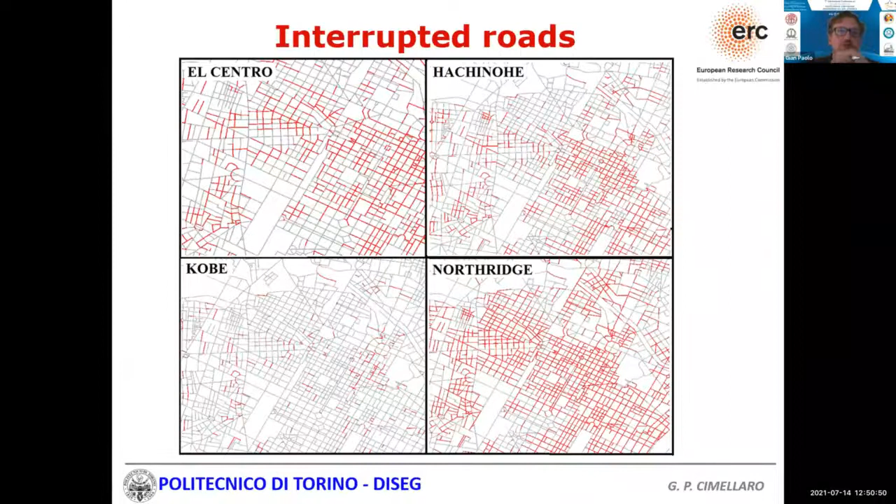We compared these results by running our analysis, and we can see here which roads were not available using this other approach. As you can see, Northridge, which is a near-field earthquake, caused the most damage.

Another interesting and breakthrough aspect of this project was human behavior modeling during emergencies. Basically, no one so far has ever modeled the panic effects and how this affects emergency response. So we looked at some matrices, memory, and how human behavior copes with a dynamic changing environment. I will not go into the details here.

For the paper, you can see it down there, written with Professor Mahin. We look at emotion, memory, and belief, which are matrices that can be combined and calibrated using surveys we performed at UC Berkeley as well as at the Politecnico di Torino with students. We were then able to calibrate this panic model.

Here is an application in a mall located in Oakland, showing the evacuation. As you can see, these points are the agents moving out of the mall right after an earthquake through the emergency exit.

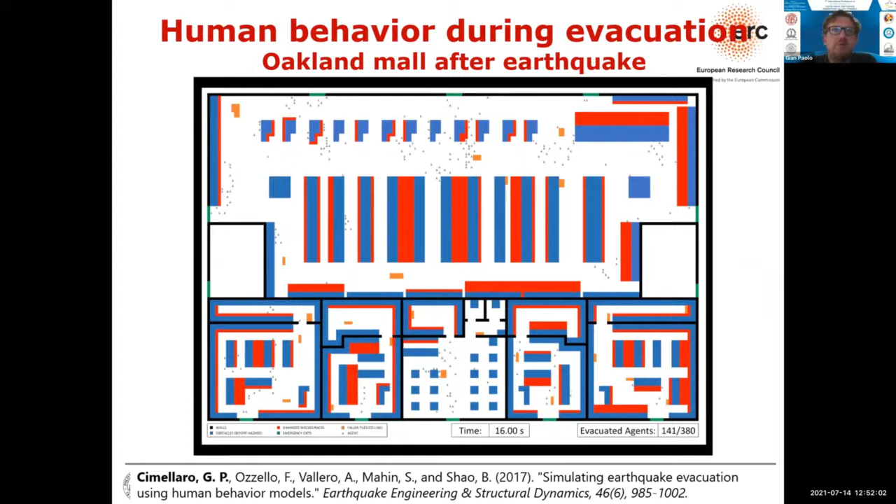We applied this concept not only to earthquakes but also to blasts. There is another publication from 2019 where we assumed there were 2 blasts in a museum. Again, we looked at emergency evacuation with and without the human behavior model. This time the calibration was done with another type of survey, but it worked well.

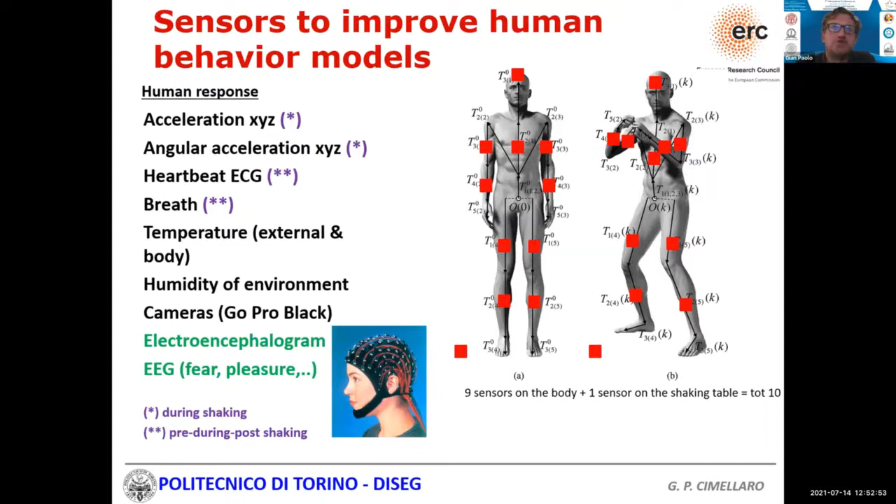However, we soon realized these questionnaires were not good enough. We needed more unbiased evaluation, because everyone thinks they're a hero when checking a box, but in reality we might behave differently. So we decided to use sensors to measure real reactions toward these dramatic natural hazard events.

But because we cannot experience a real earthquake and collect this information, the only way is to use virtual reality. So what we did was use a virtual reality mask to present one of the scenarios to people who were on a shaking table and experiencing some of this shaking.

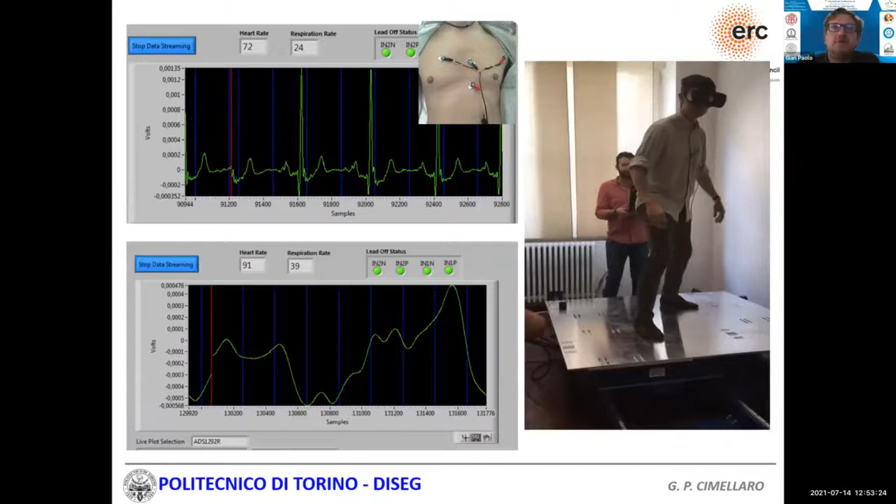We were collecting biometric parameters like heartbeat and respiration rate, trying to gather data that could be directly related to panic. We did this during the research night in 2017 at the Politecnico di Torino.

We are going to repeat this experience now in September. After 4 years, finally the research night came back to the Politecnico. This time we will do it at the Valentino Castle of the Politecnico di Torino, and we will have more chance to get more data as well.

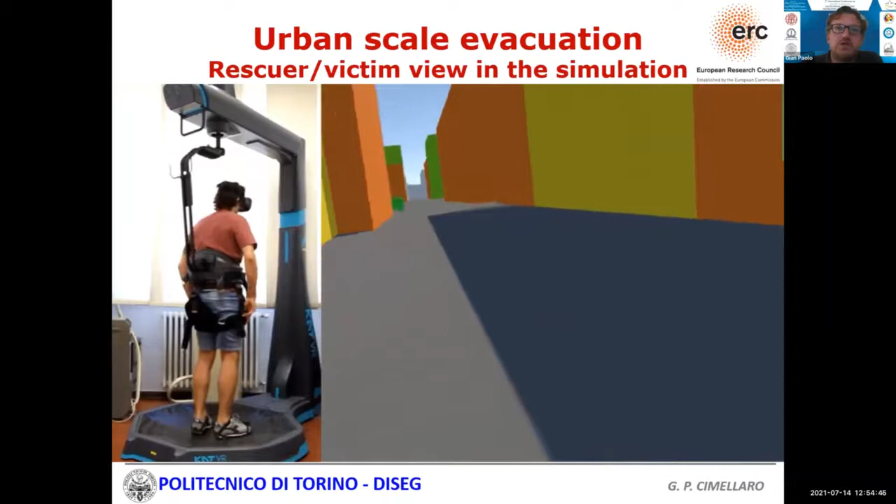The interesting thing about this simulation is that through a virtual machine, we are also able to interact - to be inside the simulation and interact with it as well.

Another project we were involved in, a side project with respect to the IDEAL Rescue, is the IDEAL Sensor project. In this project we were analyzing evacuation due to fire in a school building located in Melzo, near Milan.

We built a BIM model in Unity of the entire school. Here is some view of this simulation model.

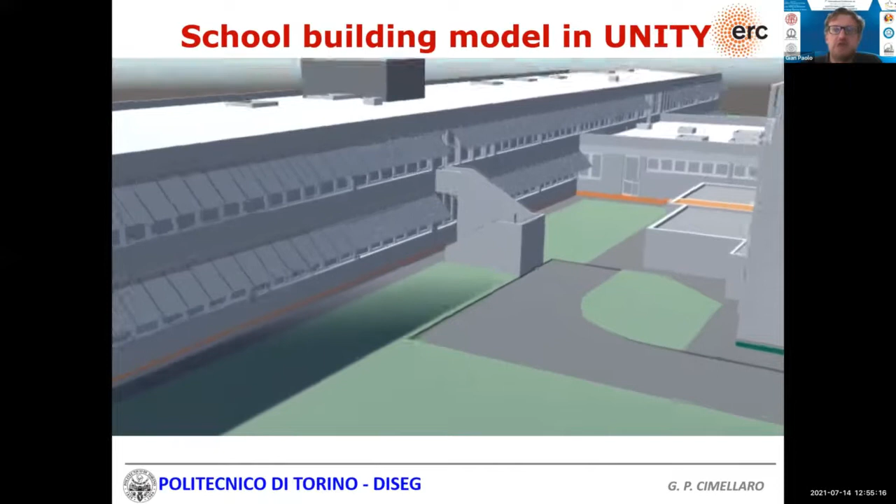We collaborated with the computer science research group of our university, and we did some analysis simulating the smoke propagation.

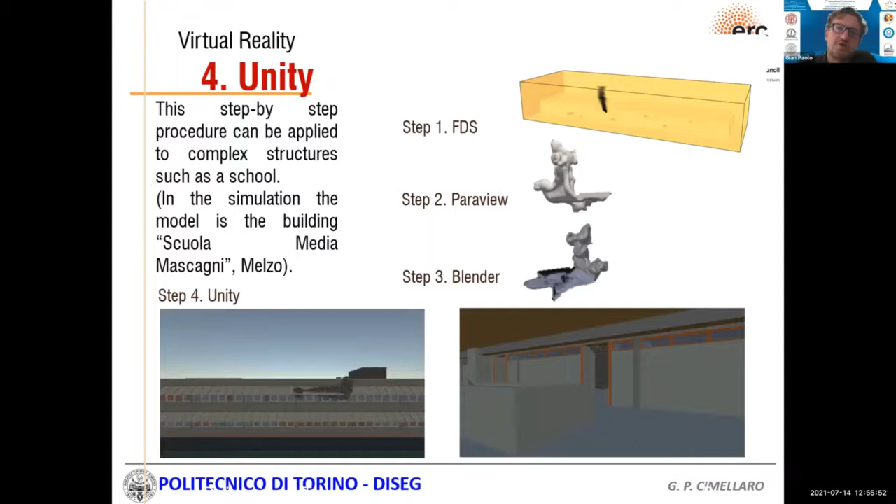With this, we built a virtual reality training platform for rescuers. Here is our platform in our department, and here is the school.

Basically the test was entering inside the school, which is on fire, looking at the map of the school, then getting through the stairs and reaching the injured person, and bringing them back to the rescue point.

So what we were doing was basically measuring the time needed to perform all these simulations. And we're going to repeat this experience also in September during the research night with the same application.

As you can see, this is exactly - I've been in that school - so it's exactly the same. They did a good job in actually representing the school the way it was.

They enter the room with fires and find the injured person on the left, then try to collect them and bring them out.

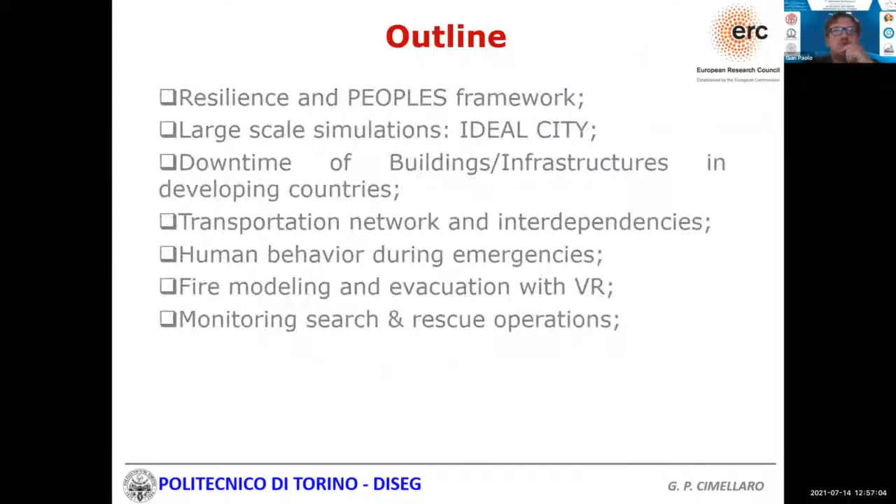I think I don't have enough time to show you everything, so let me move a little faster to the monitoring part, which is one of the research areas of our group.

We look at three types of monitoring: monitoring smart cities, which is something you've already seen, monitoring infrastructure, and monitoring people.

If we look at smart cities, we can use Internet of Things, as you've seen in some examples here.

When we look at infrastructures, nowadays this is a very sensitive topic in Italy, because as you know, a few years ago one of the famous bridges by Professor Morandi collapsed, and we were able to rebuild it quite quickly, I would say, for Italy.

We studied this collapse using the software I mentioned before, because we are collaborating with ASI, and we published this paper in Engineering Structures.

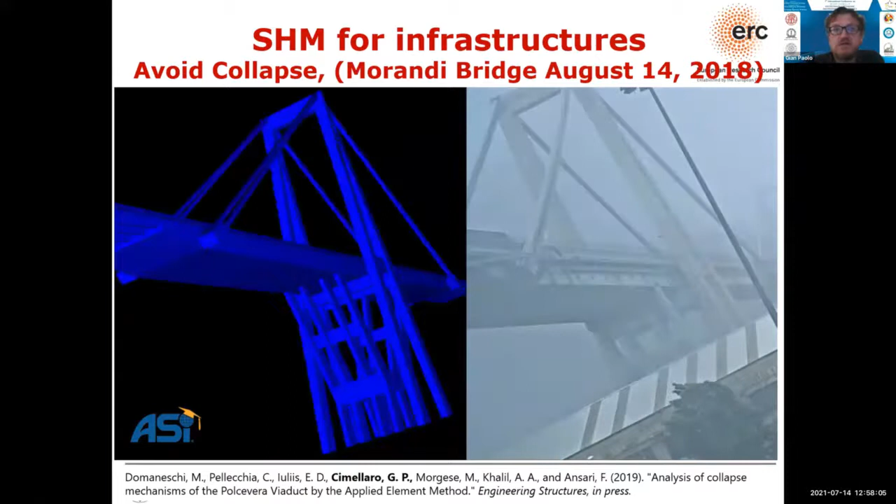Here, basically, it is now very clear that this collapse was due to lack of maintenance. Nowadays there is a big research project on monitoring bridges and tunnels to see how they perform and how they age over time.

Now, this is for infrastructures. Let's move instead to how we monitor people. We have a project called IDEAL Sensor, and now it's called IDEAL Drone.

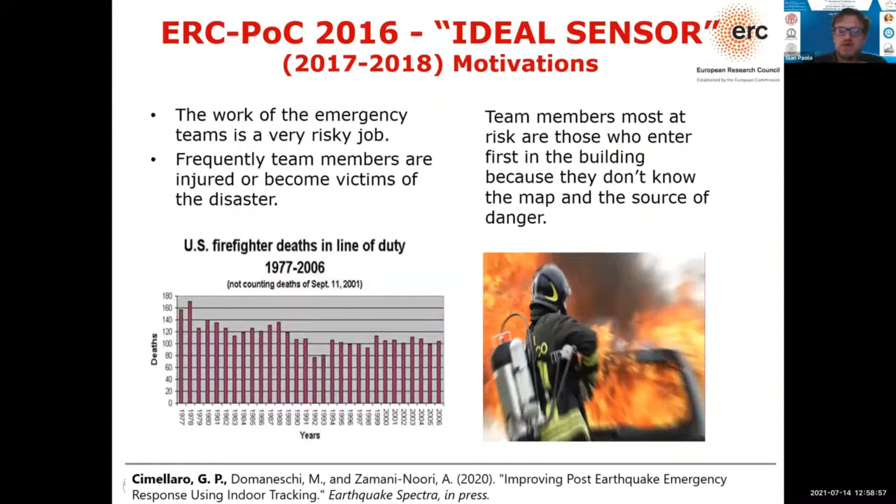It's the second follow-up project in which we're trying to monitor the position of people inside buildings which are in emergency or need search and rescue operation. So in order to optimize the search and rescue operation of firefighters, who are often at risk of death during operations because they are not aware of the building they are entering and the risks they are facing.

With this system, our idea is to let them know the position of the people who are in danger, and their health condition, by transferring to the outside of the building body parameters like temperature, heartbeat, and so on. The combination of this information will allow us to know if the person is injured, dead, or in healthy condition.

So imagine you are a firefighter outside the building, you have a map of your floor in which green shows people in normal condition, yellow shows people who are injured, and red shows the dead.

So basically the first responders, shown in blue, can then optimize the search and rescue operation and move towards the people who are injured or in healthy condition so they can move them out, and skip for now the people that are dead. So we implemented a series of anchors and tags to develop this technology.

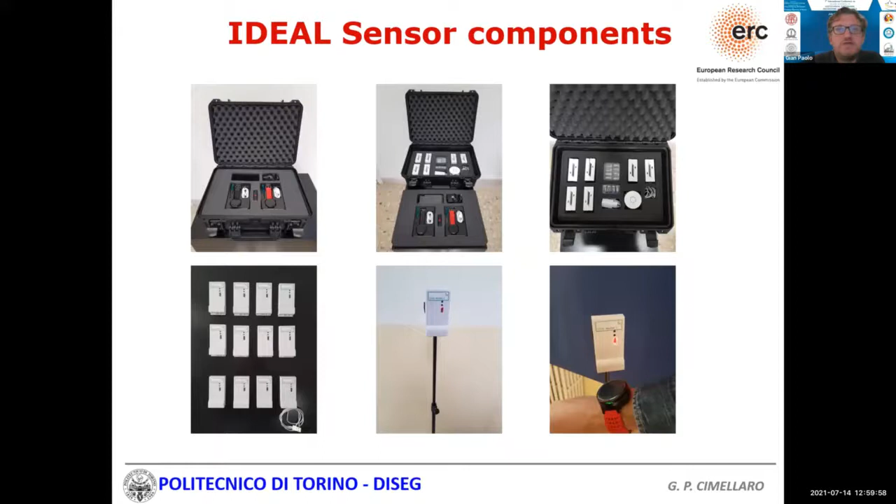And here are some prototypes of this system. We made a test at the Polytechnic di Torino and patented the system. This is the final watch we used, and this is the software to transfer the information from inside the building to the outside.

This project has also applied for extra funding by including new technology, exoskeleton and augmented reality. Unfortunately, it wasn't funded last year, and there was also the issue of COVID-19. So we are planning to reapply now with the new program, Horizon Europe.

And with this, thank you very much for your attention. I will be happy to answer any questions. Most of the things you've seen are in these papers and in this book related to resilience.

Thank you. Thank you, Professor. Hi, can you hear me?

Yes, it was a very nice presentation, and in just 30 minutes we can all imagine how disastrous an earthquake can be and how it can be managed in a very systematic manner. This is the first time we are seeing all the parts on one platform in just 30 minutes. So it's a very good session, I can say, and it improved our knowledge and understanding about earthquake management, and mitigating not only the risk but also minimizing the damages. I think Professor Ramna will tell us further.